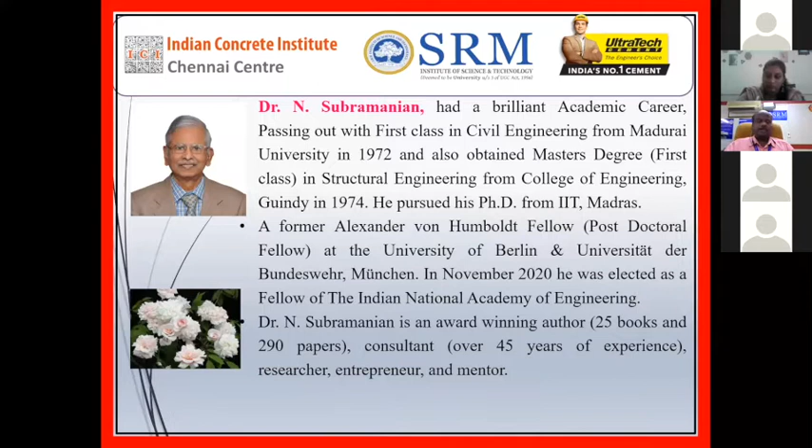Our speaker is an award-winning author, consultant, researcher, entrepreneur, and mentor. We have such an eminent speaker today to deliver the lecture. Our speaker dedicated his life mainly to education and the enhancement of knowledge of young budding engineers, and mentored them through his books, research papers, and also through social media and lectures, and through leadership roles in various professional organizations.

Dr. N. Subramanian also wrote a book, Computers and the Basic Language, in Tamil, and also wrote a few Tamil articles published in Tamil Computers and Dinamani. He has also reviewed several books and papers for many reviewed and refereed journals. He has received many awards, including the Tamil Nadu Scientist Award, Gaurav Award from the Association of Consulting Engineers, Lifetime Achievement Award from the ICI, and Best Book Award from the Association of Consulting Engineers India for 3 different books.

In addition, he received a Distinguished Alumni Award from the College of Engineering, Anna University. The American Society of Civil Engineers recognized his professional accomplishments; he was selected as a Fellow in the year 2001, a prestigious honor held by fewer than 4% of ASCE members, and he also became a Life Fellow in 2015.

In addition, he has played an active role in the Rotary movement through social activities and served in several positions, including president of the Rotary Club of Madras and also as a district official. As president of the club, he conducted several projects and received awards from the district. He has visited more than 15 countries, in addition to living in Germany for 2 years and living in the USA for the past 17 years.

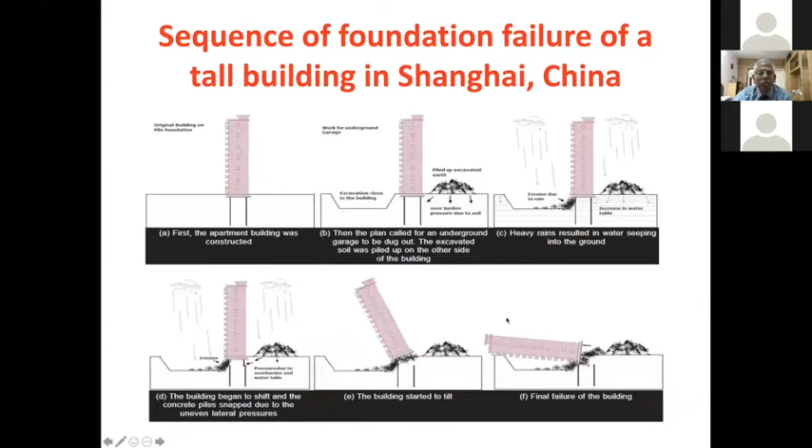Unfortunately, in India, we don't publish the causes of failure. Probably Professor Santhakumar, who was on the committee, will explain more about this Moulivakkam failure in his last lecture. The causes are mostly gross deficiency in the design of RC columns. Some critical columns were removed for enlargement of the car park, along with substandard materials and poor supervision of construction.

The next collapse I am going to talk about is the Savar building collapse in Bangladesh, considered the deadliest structural failure in modern human history. This happened in 2013. An 8-story commercial building collapsed in the capital of Bangladesh, killing 1,129 people and injuring 2,515 people. We will see the causes of this failure.

The building contained clothing factories, a bank, apartments, and several other shops. The shops and bank at the lower floors were immediately closed after cracks were discovered. This is a very important thing: whenever you see large cracks, you should not allow people to go inside any building or bridges. Warnings to avoid using the building after cracks appeared the day before had been ignored. Workers were ordered to return the following day, and the building collapsed during the morning rush hour.

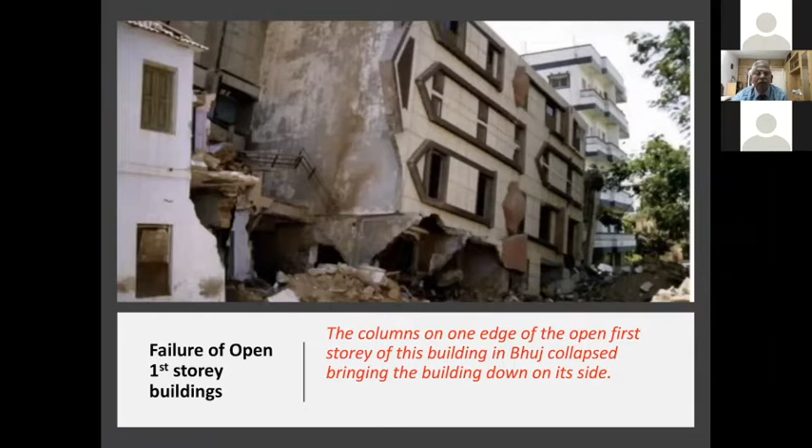And next, we will go to failure of beams and slabs. This is a very interesting failure which was presented by D. Srinivasan, who was the Secretary General of ICI, in 1975 in ICJ. Actually, this building was constructed in Neyveli. It had a span of 18 meters. As the bars were supplied at standard lengths of 12 meters, most of the rebars were lapped at the center of the beam where the failure occurred.

So this happened in 1962. The beams in the central bay were reinforced with 7 38 diameter plus 1 20 mm diameter at bottom and 1 38 mm diameter plus 6 32 diameter bars at the top with a cross section of 1425 by 600 mm. The concrete was M15 because at that time M15 was allowed. During the removal of shuttering on 26 January 1962, the entire roof caved in along the ridge. It is because all the bars were lapped at the same point.

Of course, failure of slabs are rare, especially in small buildings, but in high-rise buildings, especially using flat slab, you have to be very careful to support them properly. This is a failure which happened in Virginia, USA. This 30-story cast-in-place

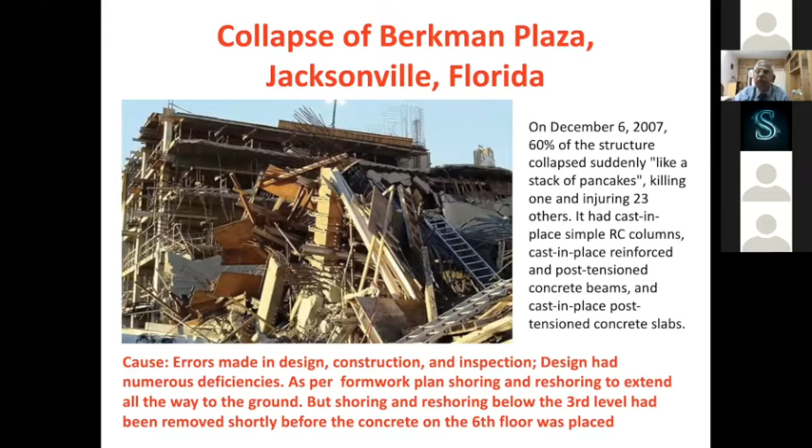The next one I am going to show is the progressive collapse of Ronan Point building. This is a very interesting failure which resulted in code changes. Actually, the progressive collapse provisions were introduced in the British code and also in other codes in the 1970s as a result of this failure.

This is a 22-story tower in East London. It suffered a partial collapse when a gas explosion demolished a load-bearing wall, causing the collapse of one entire corner of the building, which you see here. 4 people were killed and 17 were injured.

Actually, I think I have removed some of the slides due to terrorist attacks. So as a result of terror attacks on embassies abroad and Murrah Federal Building in Oklahoma City, abnormal loads were introduced in the US codes. And I think in the 5th revision of IS 456, structural integrity requirements are also being introduced. I have discussed this already.

So bridge failures, several bridge failures occur. I think from one of the papers I read, I see that bridge failures are in India as well as abroad. So I am showing.

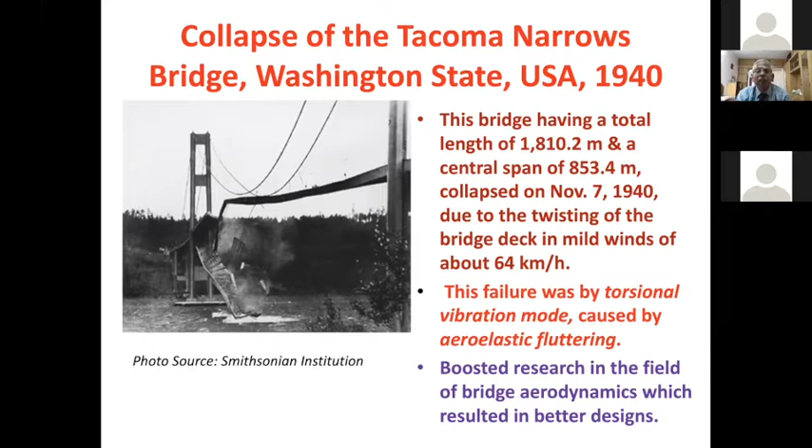This is another interesting failure of cooling towers at Ferrybridge, UK. These are the three 115-meter tall hyperbolic cooling towers which failed through snap-through buckling in England in 1965 due to vibrations in 137 kilometers per hour winds. The main cause was that the average wind speed over a 1 minute period was used in the design, whereas the structures were susceptible to much shorter gusts, which were not considered in the original design.

Actually, the designers used wind loading based on experiments using a single isolated tower. But in reality, you see 8 towers are placed close by. The shape and arrangement of these cooling towers created turbulence and vortices on the leeward towers. Similar failures resulted in the revision of building codes all over the world to include provisions regarding improved structural support and the necessity of doing wind tunnel tests for complicated configurations and arrangements.

So the next 2 slides are actually steel structures, but I just want to show that detailing errors can cause catastrophic failures. So this is a structure which failed in Kansas City, Missouri. 2 overhead walkways in the hotel loaded with partygoers crashed onto a dance floor in the lobby, killing 114 and injuring 216.

Recently you might have heard about this Champlain Towers, Miami. It was built in 1981. The 13-floor flat slab building collapsed suddenly on June 24, 2021, after 40 years, killing 98 people. The official cause of the failure is not yet known, but there is an investigation going on, which will be publicized later on. But I feel that the failure is due to corrosion of rebars due to improper maintenance, punching of the flat slab due to this, and column failure due to corrosion may be the cause of failure.

And the final case study which I am going to show, once again like the first slide I showed about the foundation failure, I am closing it with another foundation failure. Actually, it has not yet failed, but it has sunk. It was opened in 2009. It consists of a 12-story tower and a 58-story, 197 meter tall Millennium Tower. Of course, the sinking happened only in the Millennium Tower.

In 2016, the tower sank 41 centimeters with a 5.1 centimeter tilt at the base and 15 centimeter tilt at the top, and caused cracks in the basements and the pavement surrounding the tower. In 2018, the sinking increased to 46 centimeters with a lean of 36 centimeters. Actually, you see that initially they provided friction piles only. They did not go up to the bedrock. But now

So in summary, several failures of RC and steel structures are happening throughout the world at regular intervals, and the failures may be due to problems in foundation, columns, beams, slabs, walls, or due to wind, earthquakes, or severe loading. Though design errors are rare, as I told you in the last slide, many errors are due to detailing, execution, corrosion, or improper maintenance and poor materials.

It is important for structural engineers to study these collapses, find out the causes, and avoid these mistakes in their own practice. Unfortunately, in India, the causes of failures are not made known. It is also important to have peer review of design, especially for special buildings or very large buildings. And it is very important to have coordination between the parties involved in the construction. That is, designers, builders, and architects should coordinate and clearly explain the concepts. Computer results should not be blindly accepted, and maintenance is as important as construction.

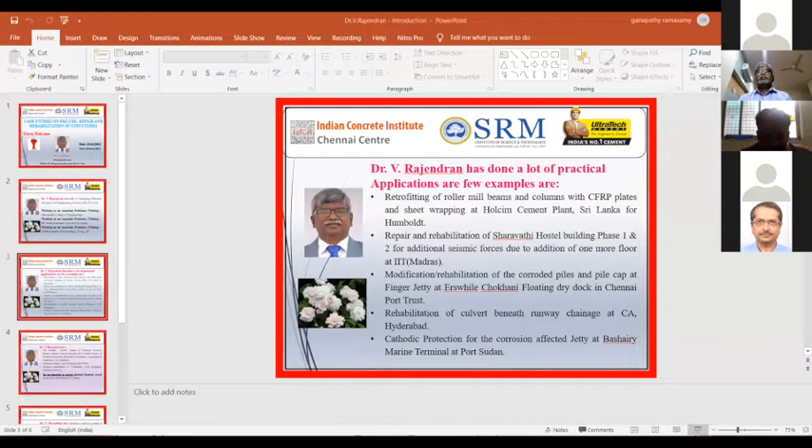He is working as a visiting associate professor in various colleges like Meenakshi Engineering College, B.S. Abdur Rahman Crescent University, GMR Institute of Technology, Vizag. And Rajendran sir has done a lot of practical applications. A few examples: retrofitting of roller mill beams and columns with CFRP plates and sheet wrapping at a cement plant in Sri Lanka for Humboldt. Repair and rehabilitation of Sharavathi Hostel building, phase 1 and phase 2, for additional seismic forces due to addition of one more floor at IIT Madras.

Rehabilitation of the corroded piles and pile cap at the Finger Jetty at the erstwhile floating dry dock in Chennai Port Trust. Rehabilitation of a culvert beneath the runway at Hyderabad. Cathodic protection for the corrosion-affected jetty at a marine terminal at Port Sudan. So these are some of the examples of the practical applications.

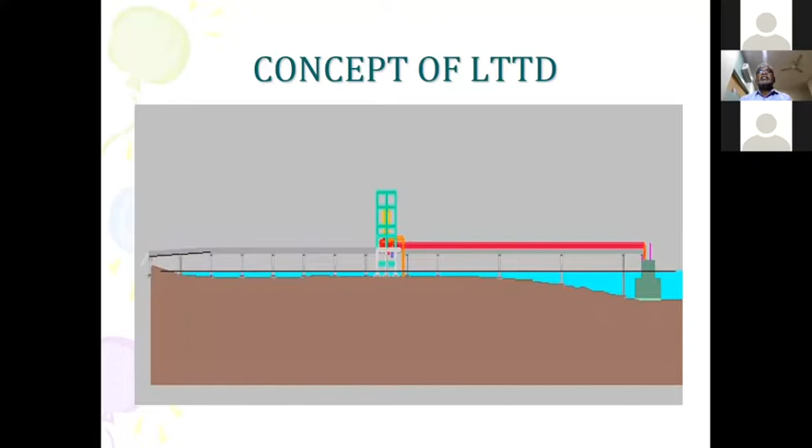The warm water is flashed inside the vacuum flash chamber, and the resultant vapor is condensed using cold water. For getting 1 liter of drinking water, about 400 to 450 liters of seawater is drawn through a 600 millimeter diameter pipe. When it is sent back, it is proposed to use a 230 millimeter diameter pipe, so that you will have a captive power plant producing electricity, making the entire project self-sustained. The biggest advantage is there's no chemical addition needed for this drinking water, and it's not a reverse osmosis system where you need to keep changing the membrane frequently. It is a completely self-sustainable project.

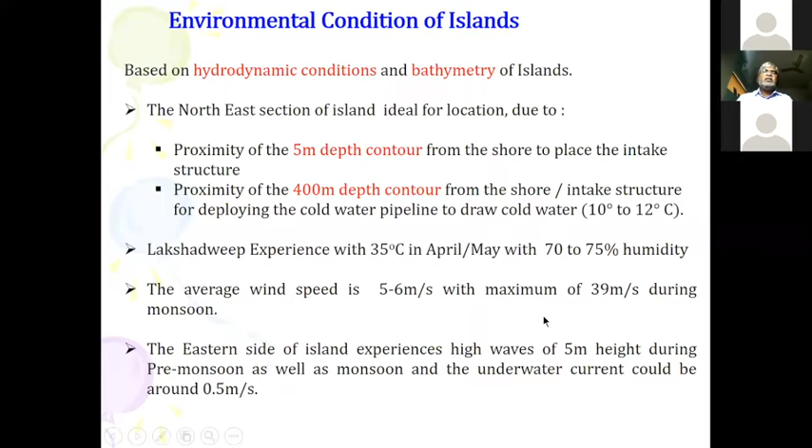The environmental conditions were studied: a proximity of 5-meter depth contour on the shore for the intake structure, and a 400-meter deep contour from the shore to intake water at about 10 to 12 degrees temperature. This was done during April, May, with 35 degrees surface water, humidity of 70 to 75%, and average wind speed about 5 to 6 meters per second, maximum 39 meters per second during monsoon. The wave load taken for this design is about 200 kilonewton per square meter, with maximum wave height about 5 meters pre-monsoon and 9 meters during monsoon. These are the data collected for the design aspect.

The dimensions of the sump: the floating foundation at the bottom is going to be about 12.17 meters by 8.3 by 9.1. Since during peak monsoon you'll have about 9 meters of wave height, and pre-monsoon 5 meters, 9.1 is what we designed for the sump foundation. Over this you will have 2 watertight compartments in the sump, with 2 electrical motors for drawing water, which is actually an intake structure, otherwise you wouldn't call it a sump.

The design takes into account dead load, live load, equipment load, erection load, wind load, hydrostatic load, and load combinations as per code 4651. All loads were taken, and 200 kilonewton per square meter was the wave load used, which was also tested for overturning and sliding, because the sump is anchored only at one end, like a cantilever retaining wall. So overturning was checked, and sliding was checked, all as per the design calculations.

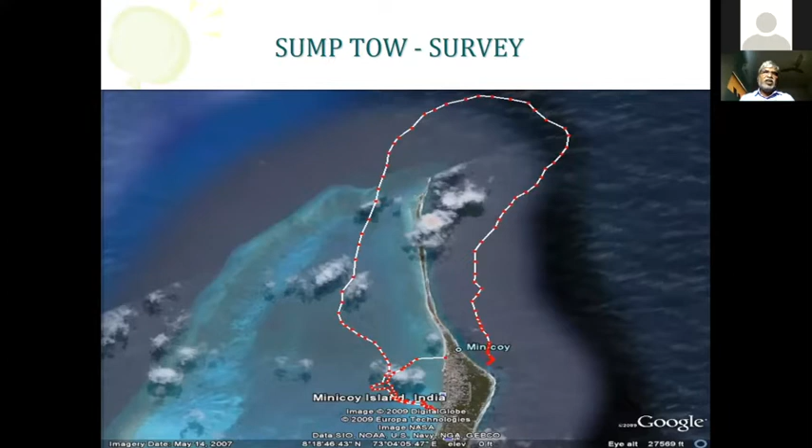Now let me go to the pictures and show what happened. This is an aerial view of the island. Initially we did a bathymetric survey to find the maximum depth by which we'll be able to take the sump through the mouth of the island, and bring it to the other side where a fisheries harbor jetty is already available, so it can be tied for partial construction and continue the rest.

As we know, the bottom of the sea is not going to be plain, it has a lot of undulation. So permission was given for a 15 meter by 15 meter area where the seabed surface can be made fairly leveled. We also proposed a pipe on raft foundation, so that once the sump or floating structure is anchored into the seabed to a depth of about 12 meters through a 32 millimeter diameter anchor rod with polyester resin that sets underwater, we also wanted to grout the base of the raft after construction with non-shrink underwater grout. So chipping was done to the maximum possible extent, so we don't have any point load on the raft design, since it is taken as a UDL.

Now, construction on shore: as we see, we have already done the bathymetric survey. Based on the survey, we determined to what extent we'll be able to float. We got about 200 tonnes as the load that can float on the other side of the island before bringing it to the mouth of the island.

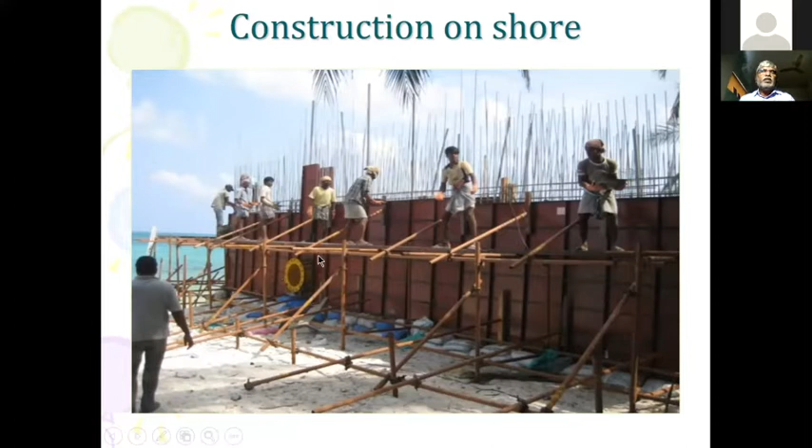So we have gone up to 3.5 meter, and you can find all these inserts have been provided for the pipelines to get connected. As I said, it's about 3.5 meter, and 200 tonner is the buoyancy which can float. We have taken about 170 tonner as the weight of this at this particular point.

As I explained already, although we are going to make the seabed a fairly level surface, we will not be able to make it pakka. So what we did is, when we casted this raft, we provided PVC pipes, about 18 numbers, so that we'll be pouring non-shrink free flow grout which sets underwater after making the barricading underneath the seabed at 9.1 meter, so that this grout does not flow. As this grout has the property of non-shrink, it expands and makes a perfect contact between the bottom of the raft and the seabed.

That's like any other slipway arrangement that has been done. A slipway arrangement was made, which is normally done in the harbor, where you'll be able to push this into the water and it will float, and you'll be able to bring it out through the mouth of the sea. So, in addition to pushing, we also wanted to pull it.

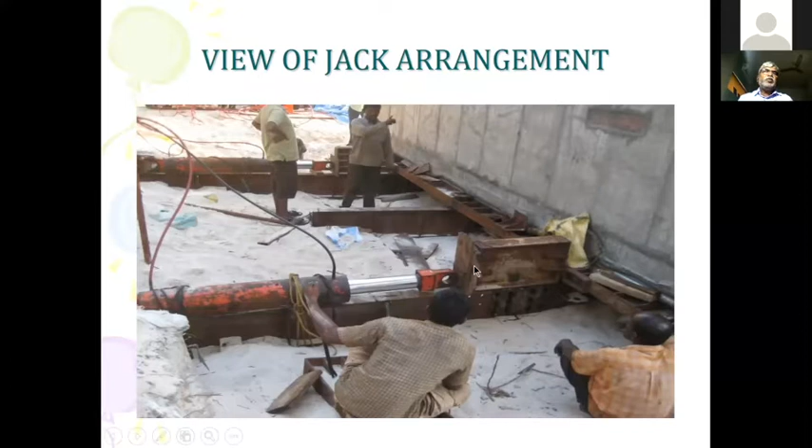You can find anchors have been placed where the sump is there in the shore, and anchors have also been placed over here. Simultaneously, both pushing and pulling has been done, and 200-tonner jacks have been used to push this sump into the water during the low tide level, so that the steel frame arrangement for the slipway can be monitored properly, whether the underneath support is in position or moving.

So this is during the low tide level, and once you get the high tide level, it starts floating, and then you just bring it out through the mouth of the island and bring it to the fisheries harbor jetty, which has already been there and is being used by the Lakshadweep Harbor Works.

Further construction has been done, and later on, after taking this and putting it in position, we'll be filling this with pig iron, or otherwise with blue metal of 40 mm, so that the dead weight calculation goes as per the design calculations. Actually, this is the structure we would like to have functionally for using this.

We used completely Tata CRS steel. I would like to pass on this information: although we bought this corrosion resistant steel well before it was even used, we found that when it was there on the shore itself, despite being CRS, a number of rods got corroded on the shore itself, well before it was put into use.

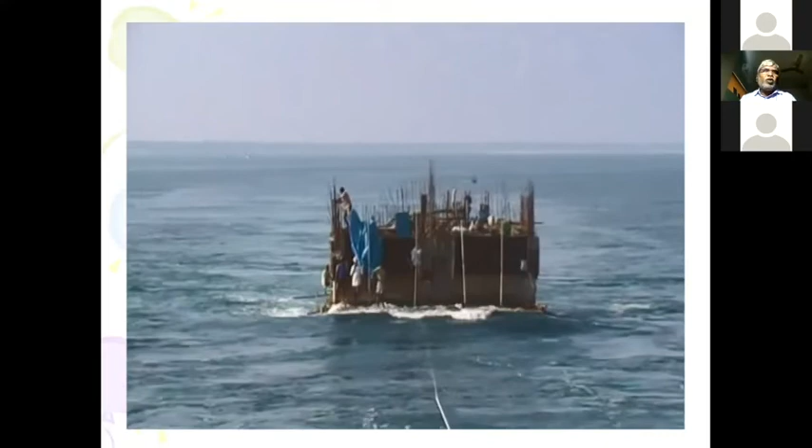So we thought CRS was going to be a foolproof system where nothing would happen, but that was not the case. After that, this was taken, and the entire structure was taken out when it comes to the open sea with further construction, which was floated, and it took about 4 nights and 5 days for us to bring the structure to the other side of the island, so that we would be able to anchor it, and the proposed bridge structure and plant structure is being done.

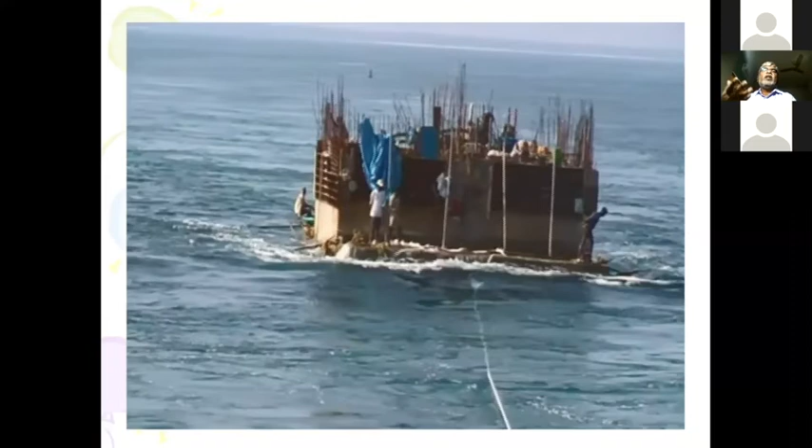The challenge over here is the cold joint. We don't want any cold joint leaking to take place, so we have used both type A and type B waterproofing systems, because type A alone we will not be able to go as per BS 8102:2009. We used water stoppers, both PVC and expandable swellable water stoppers, and admixtures giving about 6 hours slump retention, avoiding to the best possible extent any cold joint issue, so that it doesn't leak and water get into it.

So this was floated and then brought to the particular place where it is supposed to be anchored, and the anchoring was done as we discussed. This is the structure which is going to come under the wave breaking zone, or a bit earlier to that. This particular area is where you're going to have much of the issue, where this wave breaking zone is coming, and the maximum force is going to be over there.

As I said, even the foundations also will not be able to do cast in situ foundation. It has been isolated foundations that were originally designed, cast at site, and then we took that and positioned it.

Especially in the wave breaking zone, it was not a single isolated footing. Partial work was done, and this was also floated.

Now the problem is, at least the sump can be brought through the mouth of the lagoon. Where it comes to the open sea, buoyancy is not an issue at all. But in this case, the depth is going to be very low.

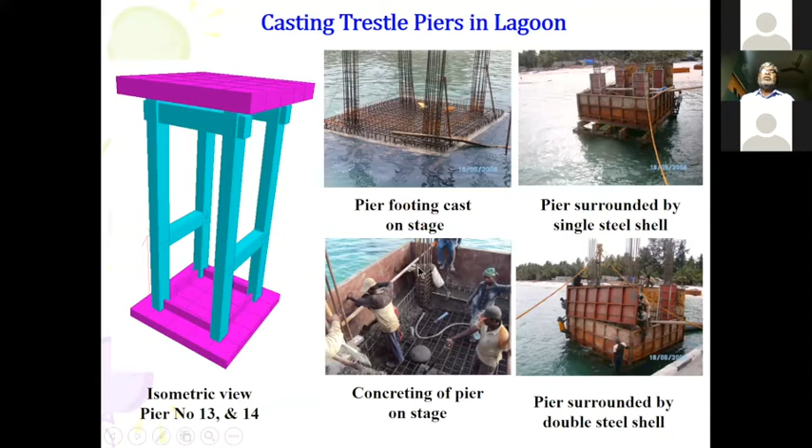So we need to provide additional buoyancy. We made the same shuttering formwork system all around, and provided sealant in the joints so that no water gets percolated. In addition, we also used pipes for getting the additional buoyancy force. Once it was done and made perfect, the partial concreting was done.

You can find this for additional buoyancy. We also tied these tubes so that it can float without any issue. Then, the same way the sump structure has been floated, this was also taken, and you can find the sump has already been anchored into the seabed.

Now for the bridge structure, you need to align it, position it, and anchor it. The line and length was not a problem because we were able to achieve it at all 4 levels. We had tied it and then brought it down to the perfect position.

If it is not sinking into the perfect line and length, we will have a problem, because the top girders coming in, the concrete precast girders, don't have much play on that, so it has to be positioned in a proper manner.

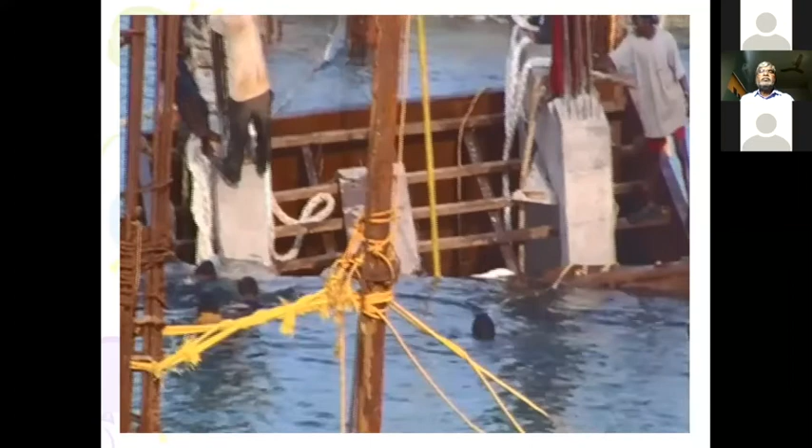The whole issue involved a lot of constraints. Now you can find the length, size, and line are not an issue. It is perfectly on the line which is expected.

The problem we faced, which pushed us into rehabilitation or retrofitting, was this P12 pier. As I told you, there were precast beams, and after that these precast beams were placed on top of these columns, then concreted with micro concrete, so that there was no issue as far as the congested reinforcement was concerned.

We used this A-frame, which is normally used for girder launching from one pier to the other, and deck slab casting was done.

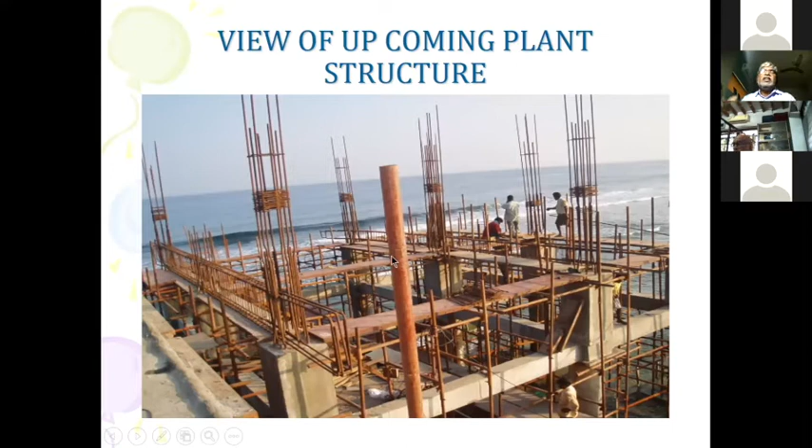This is a modeling of the plant structure. This is the plant structure which is under construction. Here we don't have much of an issue because it's not under the wave breaking zone.

Once everything was over, at high tide level, we removed the steel sheets all around it, and then wanted to proceed with further construction of the column height to match the level of the girder.

We found that during the monsoon, heavy forces were there, but this was already taken into design consideration. We went underneath and found that there's a crack taking place in 2 columns of the foundation, which started slightly as a crack and began leaning.

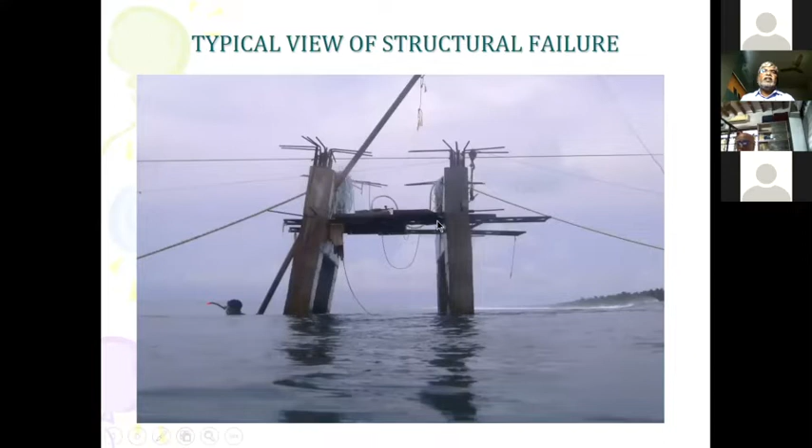The crack kept widening, and then concrete started falling. You can find it started leaning towards this, and at one point it had already come and touched the other 2 columns. If you look at the bottom, you can find there is absolutely no concrete where the raft and the column join.

After these columns touched the other 2 columns, once the moment was over, we had shear into effect. These 20 millimeter diameter bars, 4 numbers, got completely cut, as if cut with a cutting machine or hacksaw frame, and all these ties were not in position. This is what happened, and again and again we started redoing this.

Revisiting the STAAD modeling, the modeling was done perfectly and there was no issue, no error. Everything was done, and design check was carried out. In fact, we also involved IIT for a proof check, and the proof check was done, and everything was in line.

But finally, we had this issue at the site. This was the failure which had taken place.

Now, how was it rectified? What we did is, we first needed to bring back the column into position and go underneath, underwater.

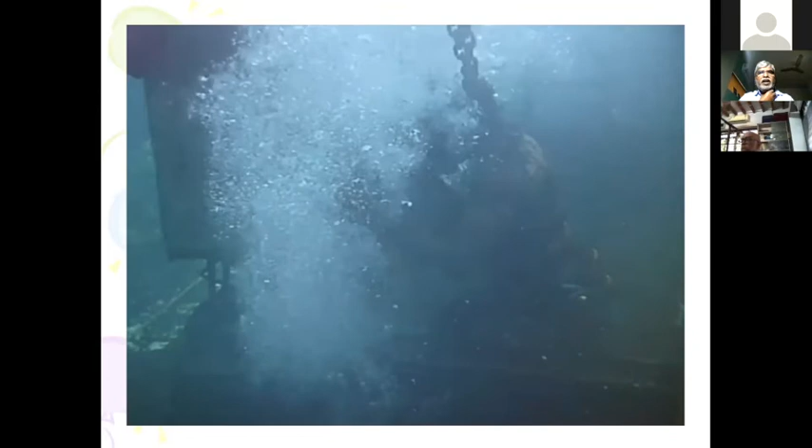Use the hydraulic drilling equipment, where you'll be able to make holes into the raft, and then provide additional reinforcement and put formwork and make the underwater epoxy concrete, so that you'll be able to set both underwater and be able to take care of your expected moments and loads.

It's very simple. Like what we do on the shore, the same thing has been done over the foundation at the raft, about 9.8 meters to 10 meters roughly from the sea level. After that, the reinforcement detailing of this cage was placed, the formwork was made, and we were able to do this underwater epoxy concrete, and it was done.

Now again, the problem is, although you do the underwater epoxy concrete, we will not be able to wait for the girders to come and then place it. So this time we didn't want to take chances. No sooner the column had been brought to the level we needed for the bridge, we made a steel girder ready before the rehabilitation works started, because even to take this underwater epoxy concrete, it took about 45 days for us from Calcutta to the site.

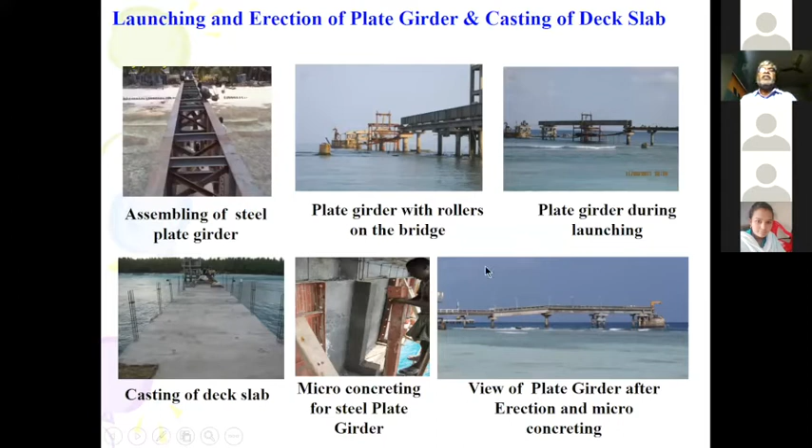Logistics is the biggest problem, and reaching the site is another issue. In fact, even for the working team to go, you need to get the permit and then reach. Although it is a part and parcel of India, we cannot go just like that. So we had taken additional steel from Calicut and made this steel girder assembled. The moment the column came to that level, the steel girder was placed in position, and the deck slab concreting was done.

Actually, what went wrong here is that we did not take seriously the sequence of operation in terms of the load which is going to act on the structure well before the girder was placed. As we all know, in the modeling, we make all the members connected together. For example, column, then beam, then slab, members parallel to x-axis, parallel to y-axis. All that gets connected, and finally we go to the command of application of load, process the analysis, take out the salient features of bending moment, shear, or whatever it is, and then do the design.

But here, well before the girder was placed over the column, the complete load started acting on these columns. In the modeling, both ends were considered fixed, whereas when the full load was applied during the monsoon, one end was fixed and the other end was completely free. The end condition was not the same as what we adopted in the modeling, which caused a complete failure. Normally in prefab structures, we say that handling stresses are always much more than the actual stresses.

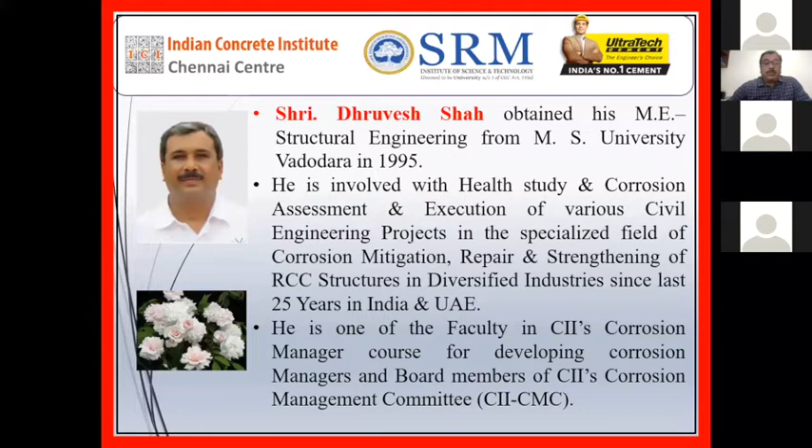UAE. He is one of the faculty in CII's Corrosion Manager course for developing corrosion managers and board members of CII's Corrosion Management Committee. Our speaker has delivered various presentations and published technical papers in FICCI, NACE, CORCON and ReadyCon and NIGIS SZ at IIT Madras, IIT Bhubaneswar and various private universities.

Currently, he is Head India Business for MS Vector Corrosion Technologies, Canada in India, and consultant for corrosion mitigation and strengthening of RCC structures. Recently, he has published an article in Journal of Building Engineering on the title Long-Term Performance and Life Cycle Cost Benefits of Cathodic Protection of Concrete Structures using galvanic anodes along with other researchers. We welcome you, sir.

Thank you. I will share my screen. Yes, sir. You can proceed. Is it visible now? Yes, sir. It's visible. Yes, sir.

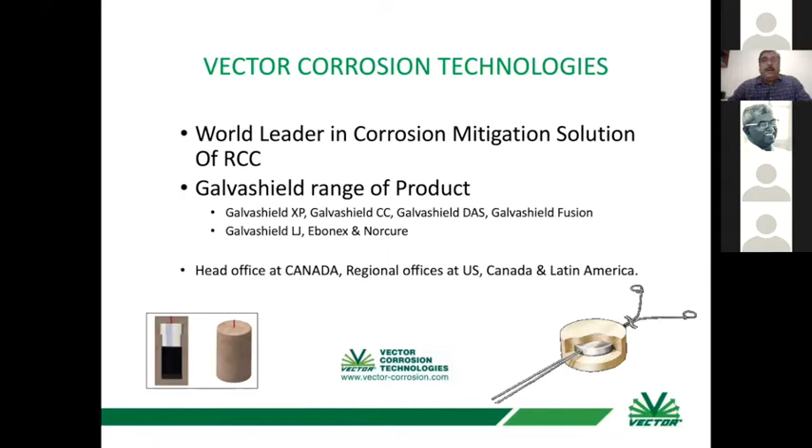And regarding failure of structures, I will not take much time, as our earlier speakers had shared a lot about the failures with wonderful case studies. Basically, they can be natural calamity, design and construction stage, environmental stage, and man-made changes in the use, or you can say abuse of the structure, which causes failures. In technical terms, it can be a structural failure and durability failures. And these durability failures lead to structural failures. And structural failures can be a compression failure, flexure, shear, punching shear, or deflection.

But I will talk more about the durability parameters, because of the leakages, there is a problem with the structure and corrosion. This corrosion induces cracks and spalls in the structure, and then it further reduces the load carrying capacity of the structure, and it leads to a structural failure in various forms. So corrosion, what rightly another attendee has asked Dr. Rajendran, what to do for the corrosion of rebar underwater. I will take care of how to take care of corrosion in case of environmentally exposed condition.

Just to go in detail with other case studies, I will have one slide for the corrosion cell in the concrete. This is a simple concrete where the two steels are tied and the rebar is having a good passivating layer because of the high pH of the fresh concrete. And when there is a contamination in the form of chloride, which you have prominently in Chennai, the chloride ingress may be due to diffusion or various other ways which I don't want to go into right now.

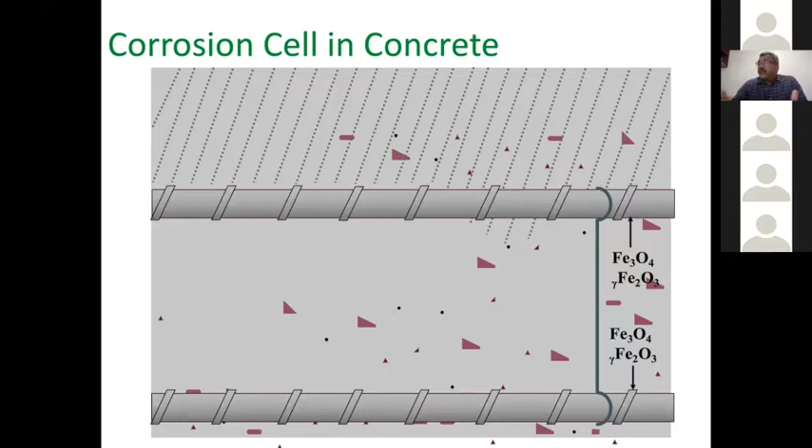When chloride ingresses, it reduces the passivating layer, and in presence of oxygen and water, which is quite possible with high humidity, the steel which is in vicinity of the contamination will become anode, which will corrode, and the steel which is away from the contamination will become cathode, and the entire chemical reaction happens, and you will get a brown color thing called rust. As we all know, when rust expands, it induces stresses, and the cover concrete, which is weaker than the core concrete, will have a lot of cracks.

And so that's why we see cracks and spalls in the cover concrete rather than the core concrete in any of the typical structures, from a slab or from any of the structures. With these basics of why corrosion happens in concrete particularly, I will go to the next slides.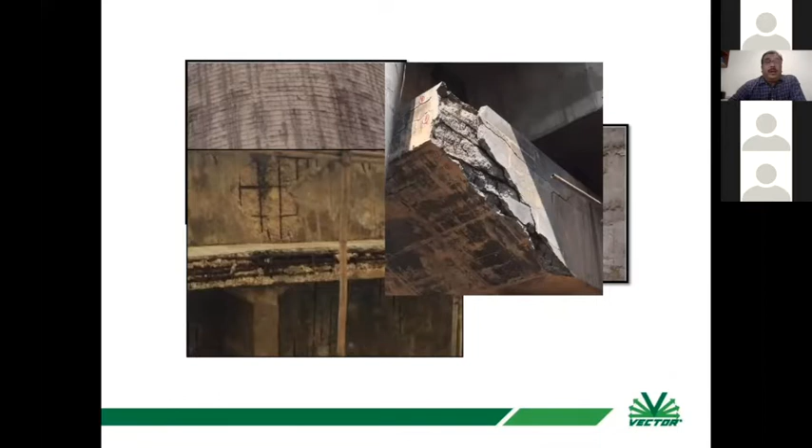And because of this corrosion, you can see a 6 to 8 year old cooling tower with a lot of corrosion. You have a beam of a jetty, like the soffit of a jetty. This is a typical pier of a railway overbridge which got corroded. And imagine if this fails, then Gujarat's Western Railway main line will collapse. And you have a column having a lot of corrosion, still it is standing.

And a collapse of a bridge, a typical structural failure of a bridge from the middle of the span because of failure of PT strands, which are a highly neglected item in the entire bridge structure nowadays. One needs to take care of corrosion of PT strands, because they take the majority of the load, and when they corrode and break, this thing can happen.

We are supposed to protect this bridge, but because of the formalities and bureaucracy, before we are supposed to start, it fails. This is the condition of a pile of one of the bridges, which is hardly 10 to 12 years old.

And this is a new problem upcoming in mega cities like Mumbai, Chennai or Kolkata, where in a newly constructed building, before people start staying in it, you find this type of problem. Imagine you are spending a crore rupees or 75 lakh rupees to buy a flat in such a multi-story building, and you see this structure, what will happen?

This is just because of ingress of chloride or chloride admixed during construction. It may be due to curing water not taken care of properly, or sand used which has high chloride, or whatever the reason. But the chloride is there from the first day, which is a cancer for the concrete, and it starts corroding the rebar, and then it leads to structural failure. We don't want these failures because of corrosion.

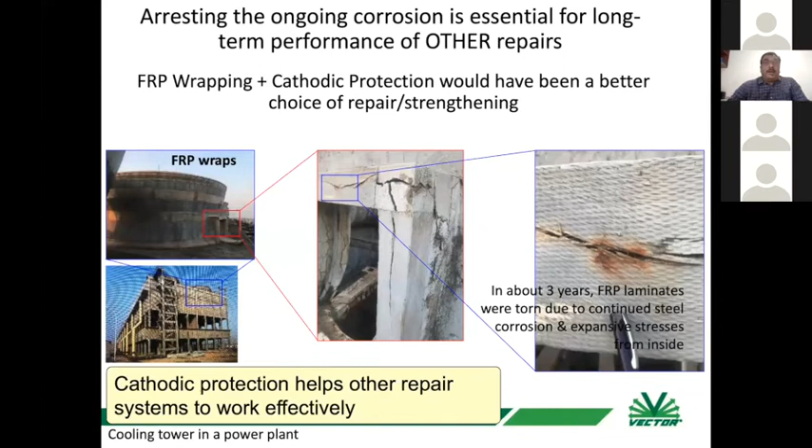We have a standard practice of structural strengthening using CFRP wrap. And when we design CFRP, even ACI 440 says that unless you take care of corrosion going on inside the RCC structure, you cannot do strengthening using a CFRP system. And it fails. We had various examples, as we can see on the screen.

And to go for any repair, I will have one or two slides on the health study and corrosion survey. When we say we have done NDT, it should not be confined to only UPV and rebound hammer or at most core strength. You should have a proper corrosion survey. You should find out the reason for the damage or distress, cracks, falling, or whatever failure is there. You have to take a holistic NDT approach, finding the corrosion probability using half cell potential.

You should know the existing cover, the existing strength, the chemical analysis, how the cracks are, the corrosion rate of the steel, and the concrete resistivity. When you take all this NDT, interpret and have a simultaneous view, and then find out the reason, you can have a very good solution.

There was a study carried out along with IIT Madras, and it was found that for the majority of structures, the repaired part fails once corrosion has initiated; when we repair during the propagation time, it fails within 4 to 5 years in the majority of structures.

And very few structures have more than 7 years of life. We don't want this. We don't want main structure repair, or repair of repair, and again re-repair. We should have a structure repaired considering a life of at least 20 to 25 years, based on the economics, value engineering and importance of the structure. So that has to be taken care of.

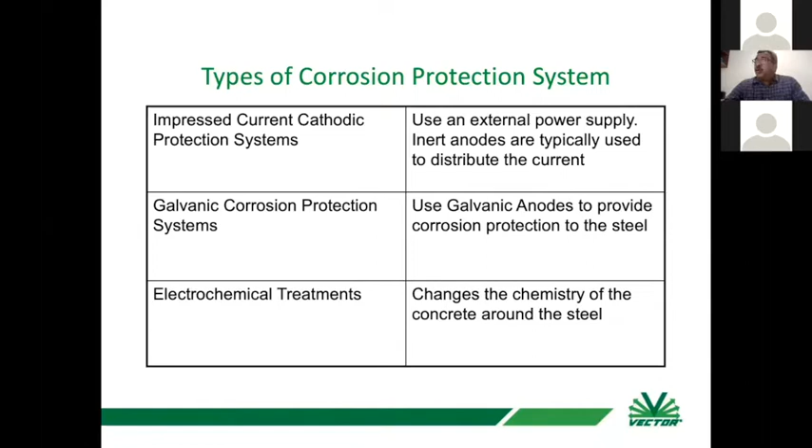When it comes to corrosion protection systems, there are levels of corrosion protection. Like we say concrete, I want to do concrete, but which type of concrete? Similarly, corrosion prevention, corrosion control, and cathodic protection. As you go to a higher level of protection, you need more current and a more enhanced, advanced system. So we will see some examples of corrosion prevention, corrosion control, and corrosion protection.

Corrosion prevention means you don't want the steel to start corroding, so you need very little current. And if corrosion is already going on, you want to control the speed of the corrosion, which comes under corrosion control. And cathodic protection is a whole-structure, foolproof system, wherein you can take a risk. Definitely it comes with a higher cost. And considering the structure's importance, we can go for any of the systems.

But before deciding the system and what level of protection we want, we should understand how to design. In a short time of 25-30 minutes, I cannot explain the entire design, but I can share the basic points one should consider before selecting the corrosion protection system. One should know the location of the structure.

Whether it is Chennai or Delhi, it's a different case. Chennai is exposed to chloride contamination. If you go to a city called Ankleshwar in Gujarat, there are a lot of chemical industries, or if you go to New Delhi, there is more carbonation effect than chloride.

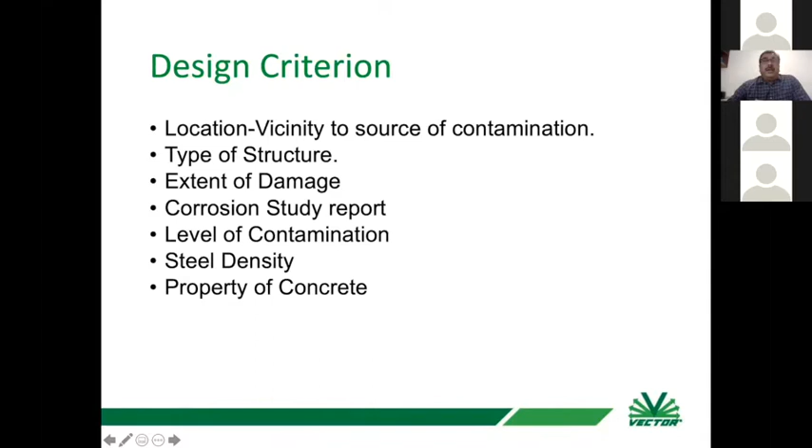And then steel density. Steel density, please don't misunderstand it as the weight or diameter of the steel, the cross section of the steel, which is a structural parameter. When it comes to the durability parameter, you should know the surface area of the steel, because we want to protect the surface of the steel from corrosion.

Property of the concrete also comes in the picture. If you have a very high grade of concrete or use various types of fines or replacement of cement, then the resistivity changes. Or if you have other types of concrete, then resistivity changes. You should consider the property of concrete for the design criteria.

Design life. This is the design life of the anode. Like the anode should function for 20 years, 25 years, so you can have a corrosion-free life of the structure for 25 years. That is what I'm emphasizing.

I'm doing these repairs and rehabilitation since 25 years, almost 26 years, and I found that 75% of the structures are having failures or distress mainly due to corrosion. And if you can delay the corrosion for a long time, you can have fewer failures and good structures. So design life of the anode to be considered, and level of protection, which I explained earlier.

Installation limitation: if access is not there or if you need to have other non-structural changes done to install the anodes, then it comes in the design criteria. Regarding the performance criteria, once you design the system, how should one know as a designer in which way my cathodic protection should perform? How can I say that yes, it is performing?

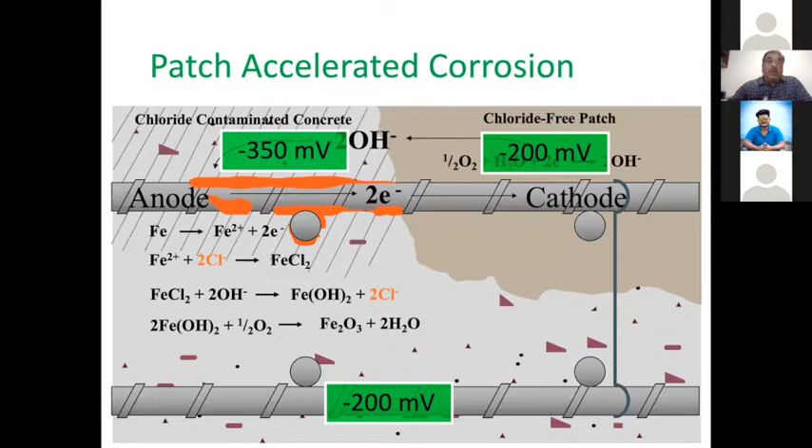If you want a long-term repair, we need to incorporate some system. We can use galvanic corrosion protection system, which is an innovative and advanced concept, and it is very good for atmospherically exposed concrete. In case of submerged concrete, we don't have much free oxygen available since it's submerged in water. So the corrosion rate, particularly in the deeper sea, is less. So we are...

The zinc will corrode because of very high negative potential, and it will not allow the reinforcement to corrode, and you can have a durable and good patch repair.

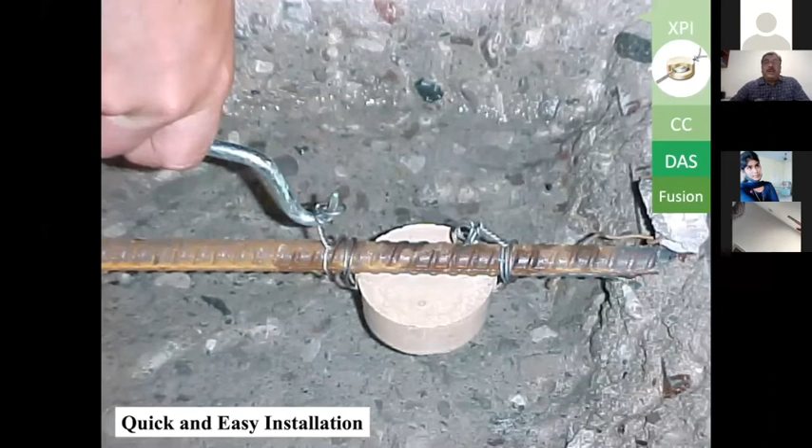This is how we do a normal patch repair: proper cleaning, saw cut, soaking, and applying the mortar. The additional thing is you have to tie an anode like this. After tying, you check the connectivity, whether it is properly connected to the steel. At the connection, the steel should be cleaned properly and there should not be any coating over the steel. This has to be ensured, otherwise the anode will not function.

I had seen various cases where the anodes were loosely connected or lying outside the concrete. You can see the anode is inside the concrete cover, there is a proper cover over the anode so that ionic movement can happen from the cover part, and the steel is properly connected so the anode will function.

We had one beam installed in 1999, and we have been monitoring it for about 22 years. What I'm telling is based on factual data of what was installed, monitored and analyzed. We found that at 20 years the data shows this type of anode can give a current density in the range of around 0.2 to 2 milliampere per meter square, as per EN 12696, and it is protecting the structure. These anodes were designed for 15 years, but they are protecting up to 20 years. This shows we are passivating the steel better over years when we use a sacrificial anode system.

There can be a longer, similar discrete anode which can give you higher current. It can be a distributed anode, a longer strip anode which you install when there is high density, high amount of steel, or high contamination. Then you need a more current and longer anodes. The discrete point anodes have a lesser current, which is good for prevention. When it comes to cathodic protection, if you use longer rod anodes, it gives you very high current as per the requirement, and it functions wonderfully.

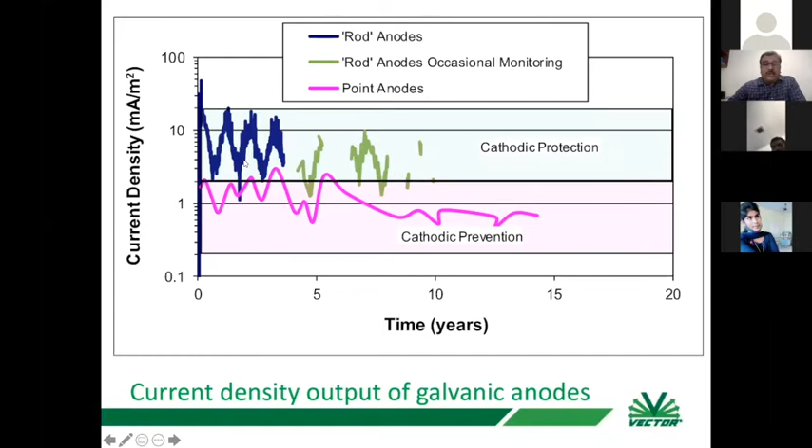I will show you a few case studies now with basics: the majority of failures are due to corrosion. Why does corrosion happen in a concrete structure? You should take proper NDT, and there are various cathodic protection systems available: ICCP, sacrificial, electrochemical treatment. With 20 years of experience, we found that galvanic based sacrificial anode systems are very good in functioning and protecting against reinforcement corrosion.

These types of anodes have been available in India for almost 2 decades, or 15 years. Earlier we were not having much technical experience and backup because it was a new technology. But I will thank Dr. Rajendran, who introduced this system almost 12 years back, when he was supposed to repair one 8-year-old jetty at Chennai.

And they found out that the chloride concentration was very high and there was significant mass loss of steel, and reinforcement were supposed to replace. So they just added point anodes here.

The design was done, and now with experience we had further rationalized the design, but the design done was 1 unit per meter square, and even a monitoring box was installed. And this is how the work was done. Concrete jacketing was done in all new reinforcement.

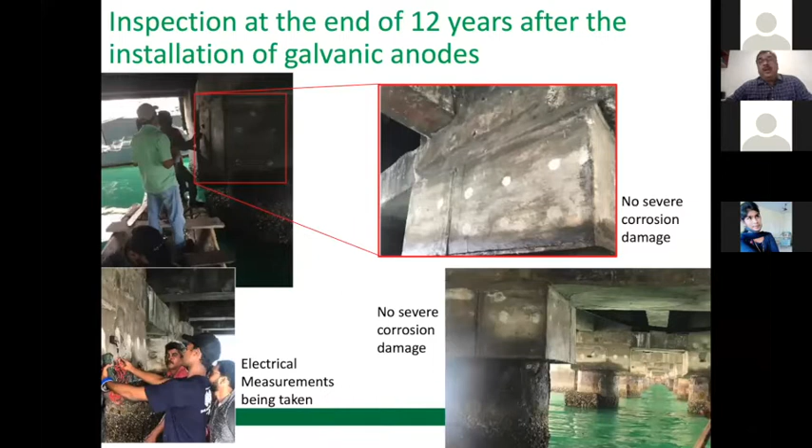Anodes have been installed. What we did is after 12 years, along with the IIT team, we had a visit there, and we found that there was no severe corrosion damage in the same structure where it was jacketed. Electrical measurements were taken, and it was found that the anodes are still protecting after 12 years, within very, very high spacing, which we normally don't recommend now.

We had checked there for 4 years as per the contract, and we found that there was depolarization potential of more than 100 millivolts. So it shows that for 4 years the anode were performing, and then the monitoring was not possible. But after 12 years, we see physically there was no significant damage, and the current was measured. Still, at various 8 locations we are having a good current after 12 years. So the anodes are functioning. If somebody wants, they can have a boat and visit the same structure even now.

Imagine in 8 years of service life, there was significant damage. And when you repair it using a sacrificial anode system, after 12 years you have very minimal cracks, not a major corrosion problem like what was there in 8 years. So this type of repair is required. A professional approach has to be done.

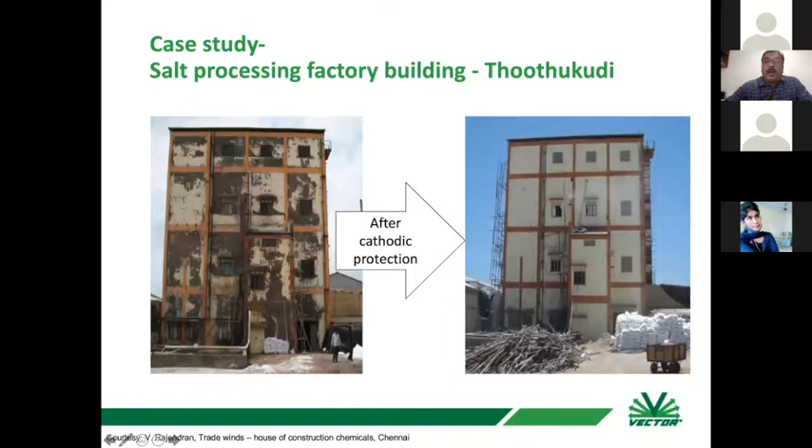This is a salt processing factory, and in case of a salt processing factory, you have a lot of chlorides and various problems. It was repaired using a CP system. These are the before and after photographs. Definitely, there was very high chloride concentration, continuous exposure to chlorides.

With conventional methods, we don't address that there is already chloride inside and high corrosion activity. So it will fail because of patch acceleration or halo effect, and you can see the various cracks.

Here again, the anodes have been installed, and then zinc-rich epoxy coating has been applied. But obviously, the spacing is very high. This was done about 10-12 years ago. I told you that we now have a more rational design, and the normal jacketing has been done. The only thing is adding this anode, nothing else.

There was a monitoring box, and we had measured and regularly monitored the corrosion, the current from the anodes, and it is performing. Again, when we do the cost analysis of the entire cost, the CP percentage cost was very low compared to the other part. So we found, and even published a paper, that the cost of CP might seem high initially as a unit cost, but when it comes to the entire repair system cost, it's a fraction.

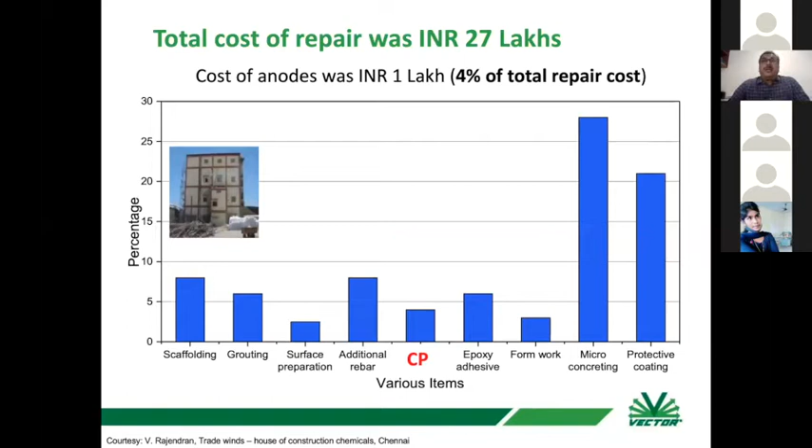So this I had shown you where there is a patch already spoiled and there are cracks. But while doing your NDT, you may come across a structure that is good, cracks are not there, but there is contamination ingress. In that case, you need a high initial current and you want to control the corrosion. So you need a different type of anode which can be drilled and inserted inside with special connectors.

Like this, a type of pre-stressed box girder where there is a patch and there is good concrete. The areas away from the patch still need to be protected, so you can have drill and fix anodes installed there.

Why I'm showing this presentation is from Dubai, which I had done, because nowadays you have a lot of multi-story buildings in Chennai with basements, multi-story basements, which are having a lot of issues with corrosion. Imagine this water coming out from the subsoil, having a lot of chloride. What will happen to your basement structure?

So when I visited one of the basements in Dubai, we found that corrosion stains were there and water was leaking. There were no cracks, no spalls, but we saw the corrosion brown rust.

So the consultant asked us to do the solution. I said, even if you arrest the water, you won't have a bone dry condition. If it is bone dry, it's wonderful. But since leaking is already there and you are seeing the rust mark, corrosion has initiated and the passivating layer has gone off during construction time itself.

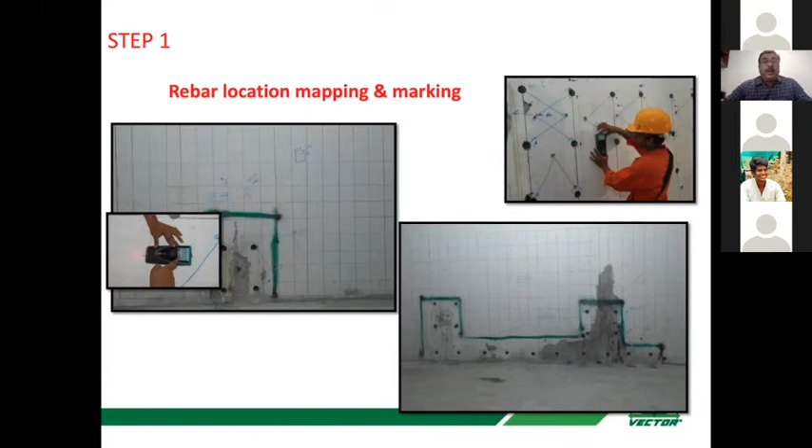And the connection is proper for 25 years - this is what we want. So we take care of every small thing: a proper connector using steel for the steel connection, then a gel-type button, and the anodes without cutting any steel, and then it is sealed with mortar.

We check the connectivity at all levels, and the voltage should be less than 1 millivolt if properly connected. So you need to check the steel-to-steel connection in the concrete, check the anode-to-steel connection in the concrete, and then seal the surface with low resistivity mortar so you don't see anything on the surface.

Simply paint it. You can install the monitoring box, take the readings, and see that your system is performing, with no external current, only a small piece embedded inside the concrete. You can save your basement from corrosion for 25 years. This is a good solution for what might otherwise fail in the near future in Chennai or other parts of the world where multi-story basements are being constructed and leakage is the problem.

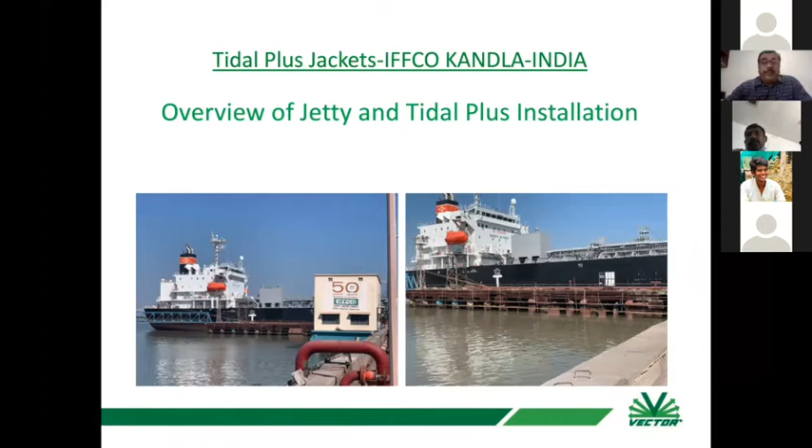Another case study I'm showing you is for jetty repair. This is for IFFCO Kandla, wherein the piles were corroding. The sacrificial liner had also corroded, and they had induced cracks and spalling in the pile concrete itself.

We had considered the height of the pile jackets, using special jackets imported from Canada. We had considered the height of the jacket as 5.5 meters because tidal variation is up to 5.5 meters there. We had installed the jacket from the bottom of the pile muff up to minus 5.5 meters, and a bulk anode was also installed at minus 6 meters to take care of very high current demand over time. The system was designed for 25 years, and the steel surface area was calculated.

This is the photograph. You can see the first left-hand side photograph, which shows the tidal variation of 5.5 meters. Then the scaffolding was erected and the steel liner was cut. In the right-hand side photo, you can see the removed steel liner, and the concrete has a lot of corrosion stains and some cracks, which were cleared with water blasting later on.

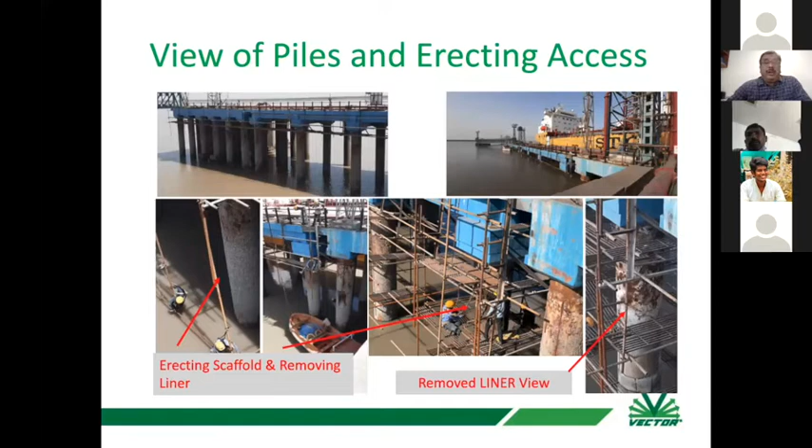And the anodes have been installed on the surface of the column. The first left-hand side photo shows the strip anode with a special fabric over the anode, which will keep the anode corroding; we want the anode, zinc, to corrode. So by wicking action, this cloth will keep the anode corroding. And then there is a bulk anode, in the center and the right-hand side photo, and special modular jackets have been installed, which will stay in place.

And then the concrete has been filled in between the old column and the new jackets. So it's a simple jacketing, but with the addition of special anodes with the wicking action, a bulk anode at the bottom which will be there in the water, and PVC modular jackets. And then you simply close everything. We are monitoring the system as of now.

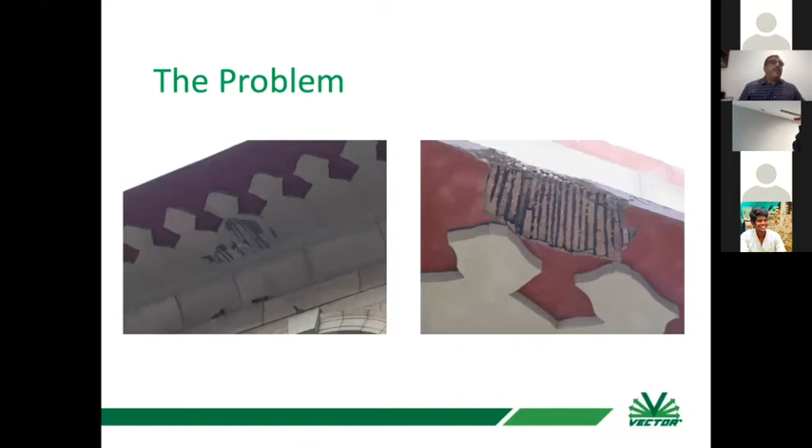In heritage structures, we talk of centuries. At least we can install anodes which will work there for 50 years, and in the contract itself, a 20-year guarantee has to be given by the contractor. So to develop that system, we carried out one pilot project wherein cantilever reinforced concrete sunshades with high corrosion of rebar and delamination of concrete were there. And earlier repairs had been done, but they failed prematurely.

And lime concrete was there; it was not cement concrete. So it was difficult for us to design the system. But we tried the pilot project with various options, and we found it successful. We developed a system which has a longer life, to protect any reinstatement already done from premature failure and retain the shape and size of the structure to avoid reconstruction of entire elements. We used different types of anodes, and we monitored for 2 years. This was the design, how the anodes were installed.

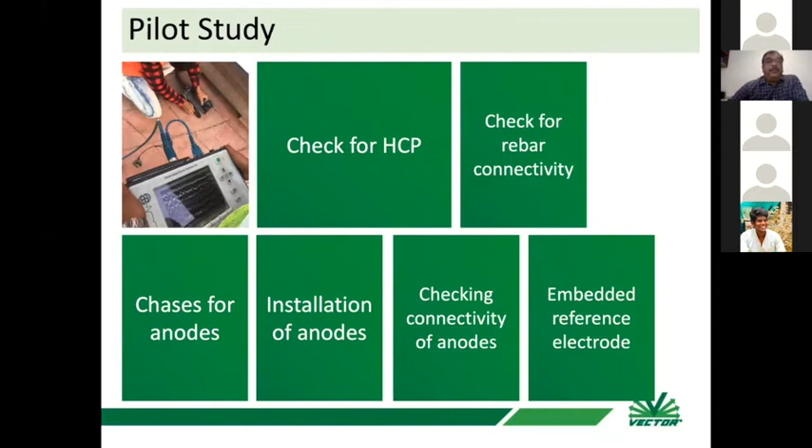If I show you various photographs, first of all, we located the rebar using GPR. Then we checked the half cell potential regularly in a grid pattern. Then we checked the connectivity of the rebar. All rebar were not connected. So we introduced a special rebar connector at the top, connected all the rebar with a wire, embedded them, and checked connectivity of all the rebar, every 5 to 7 centimeters.

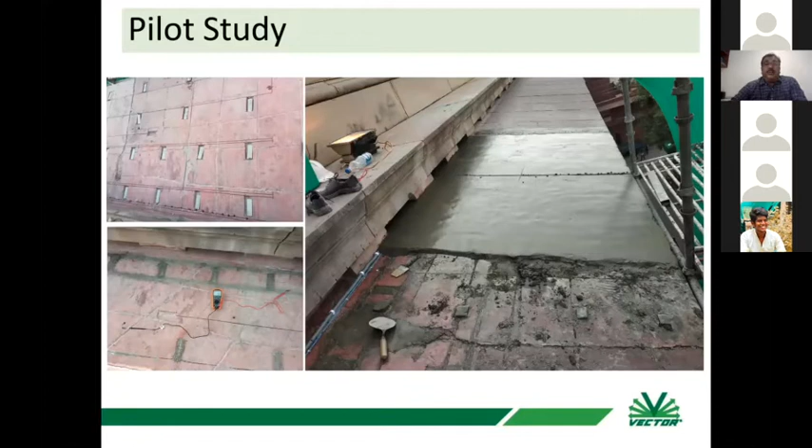Then we made a small chase for installing the anode, and the anodes were installed. Again, the connectivity of the anodes was checked. And we also installed one embedded reference electrode, so that we don't need to go there with a surface electrode to measure half cell potential. These are some photographs of checking the connectivity. Finally, the anode was covered with low resistivity mortar, and an overlay was laid because there was very little cover; we need at least 20 millimeter cover. So a 20 overlay was laid over that.

We had a person from North America who is CP4 to assist us in installing this type of anode. The key benefit is that these are 2-stage anodes. These are special fusion anodes, which give an initial very high surge of current, and then automatically convert into sacrificial mode. So there was no external current, and we were able to passivate the steel in a very short time. That's the most important thing, and it enhances the life of the structure, because the initiation of corrosion is delayed. And these are all alkali activated anodes, so there are no harmful effects to the concrete.

Further, we had installed the monitoring box, and we are taking regular current measurement and half cell measurement. And we found that initially, in stage 1, up to 100 days, it was having a very, very high surge of current, and we got very good negative potentials, and then automatically it converted into sacrificial mode, wherein low current is required, but everything was as per the ISO 12696. It passivated the reinforcement, and the system is working wonderfully. And now the full-stage project is going on for such heritage structure.

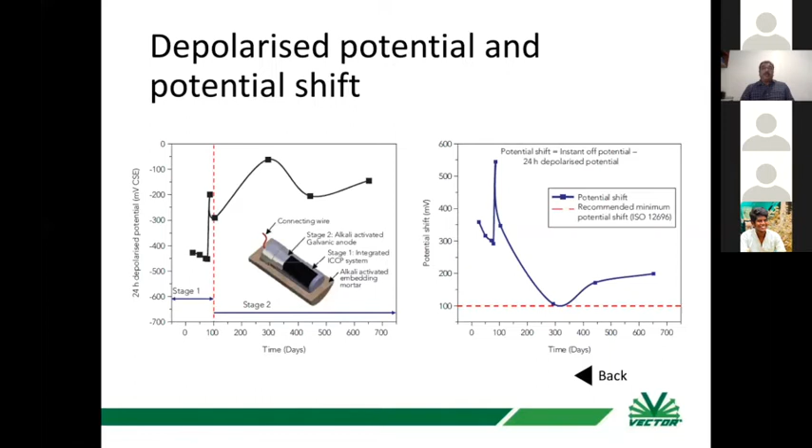The additional drop has been constructed around the column by making shear connectors as per the design. Even shear connectors have been designed, and roughening of concrete has been done for 20 millimeter amplitude, so that 50% of the shear transfer has been taken by the roughness, and the remaining 50% has been taken care of by shear connectors. 8.9 shear connectors were required, so we used 9 shear connectors per square meter.

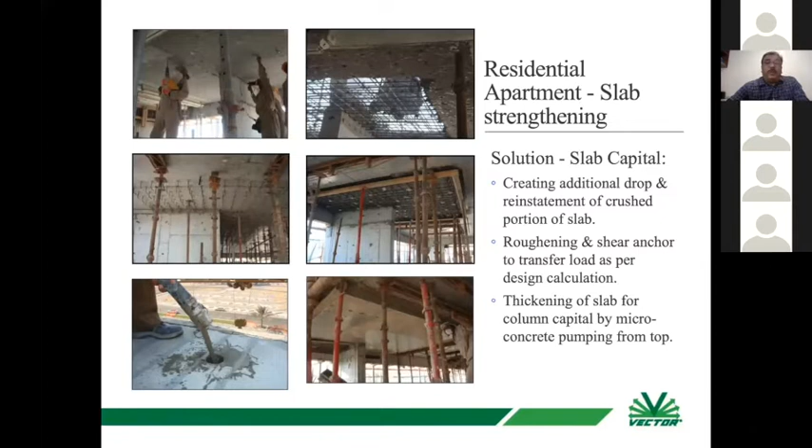And then after roughening and installing shear connectors, some area where it was highly damaged was broken out. And then we did shuttering, and micro concrete was poured from the top by making a drill. And the new drops were created. Also, we found out that there was positive and negative moment deficiency.

So we cut, and near surface mounted carbon fiber strips were installed from the top, and cost was the constraint. So what we did is we cut from the bottom, and we installed the rebar in the bottom soffit of the slab, like 12 mm steel. We used rebar grouting for embedding the new steel connection in horizontal holes; we drill 20 centimeter, 30 centimeter holes and insert the steel.

This way, we inserted the steel along the length for 3 meter and 4 meter, and 10,000 meters of steel was inserted on the soffit, and the building is standing wonderfully. It's perfectly standing. This was done under my design and installation back in 2009, and the system is working wonderfully since almost 12-13 years.

If I talk about CP usage in India, we have been using it since 2002 and it is growing exponentially; people are adopting the system, so there is no harm. And there are various buildings like chemical plants where it has been installed. In institution buildings also you can use such type of anodes. You can use the anodes along with strengthening also, to have a longer life.

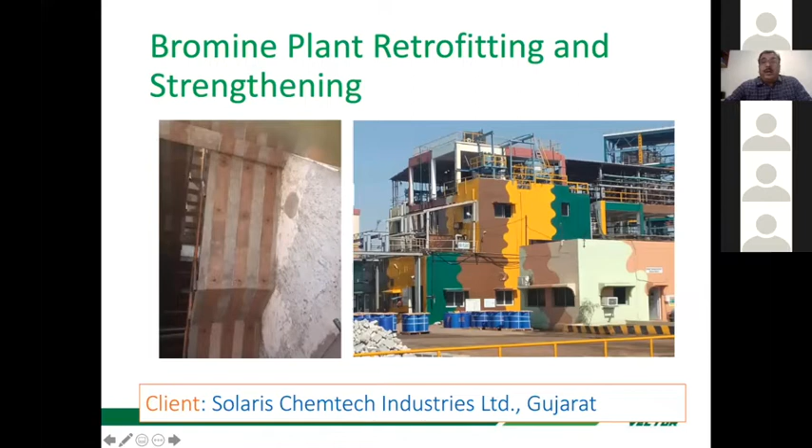But how to select the anode? Your anode has to have a proper activating mortar which should keep the zinc corroding. It should have an alkali material. It should not have halides or salts, and it should keep zinc corroding for 25 years, maintaining the pH, so that when zinc is corroding, you have a long-term connection of rebar and zinc for 25 years.

It should not be welded. It should be cast inside the zinc anode. If you have welding or screwing of the wires at the zinc, when zinc is consumed, this connection will go off and the anode will not be usable. So this is a wonderful technique, but poor practice or poor material will give you poor experience and the whole technology will die.

So before selecting the anode, you should know what type of anode I am installing, whether it will function there for years, not for months. We have in the tender or contract that 1 year is the defect liability period. So any anode will perform for 1 year or 6 months. You will not come to know of new cracks in 1 year. You will come to know after 3-4 years, 5 years. So your anode should be such that it performs for 25 years.

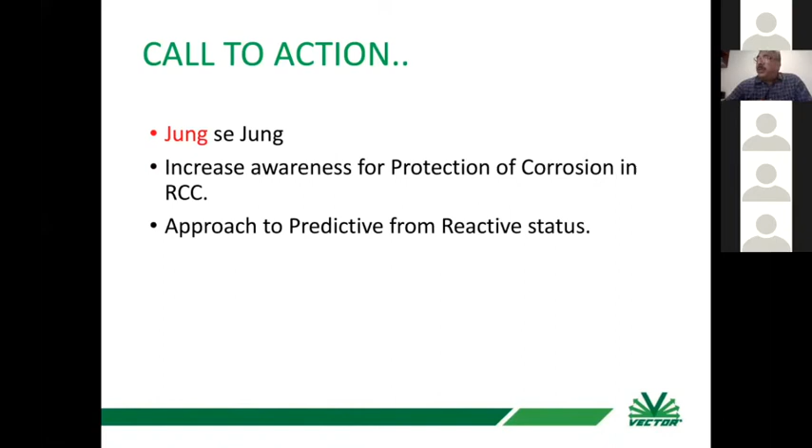What we do now is go and do the repair after we see spalling and cracks. That is the third level of corrosion. Whenever we see an initial crack or rust stain or something, we should immediately do NDT. Increase know-how of the technology available. This technology is available. Then there should be a specification at the design stage. We are trying to incorporate this in the codes also, BIS also.

I will just conclude that India is in dire need of an effective corrosion protection system. Corrosion prevention strategy needs to be implemented in new structures also. It can be targeted protection, and CP technology does not add significantly to the cost of repair. It can be considered a complementary system. It is not as costly as somebody might think. Repair using CP is economical when considering life cycle cost, and the anodes available in the market must be assessed before installation. Use of poor quality anodes can lead to reduced repair life and defame this promising technology. This is very important.

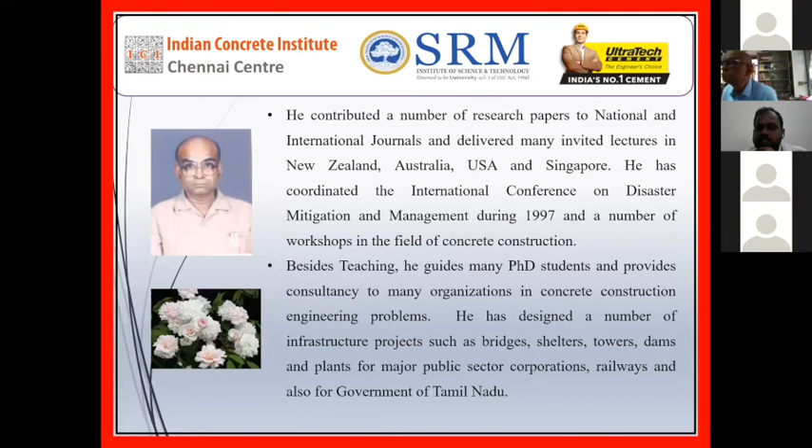He has designed a number of infrastructure projects such as bridges, shelters, towers, dams and plants for major public sector corporations, railways, and also for Government of Tamil Nadu. He has received ACCE Nagadi Award for the best book published on transmission towers, McGraw Hill, Singapore edition, through Association of Consulting Civil Engineers, India. He has also published a very popular book on concrete technology, Oxford University Press, which again received the ACC award.

Recently, he was acknowledged as an outstanding academic person and was awarded the prestigious Vishwakarma Award of Construction Industry Development Council. Thank you, sir. With short introduction, I request you to start a presentation, sir.

Thank you, sir. Thank you very much for the nice words of introduction. I once again thank all for giving me an opportunity to present a few of the case studies in which I was involved during my last service of 25 to 30 years, both at College of Engineering, Guindy, as well as at IIT Madras. I would like to share my screen now. I hope you are now able to see my screen.

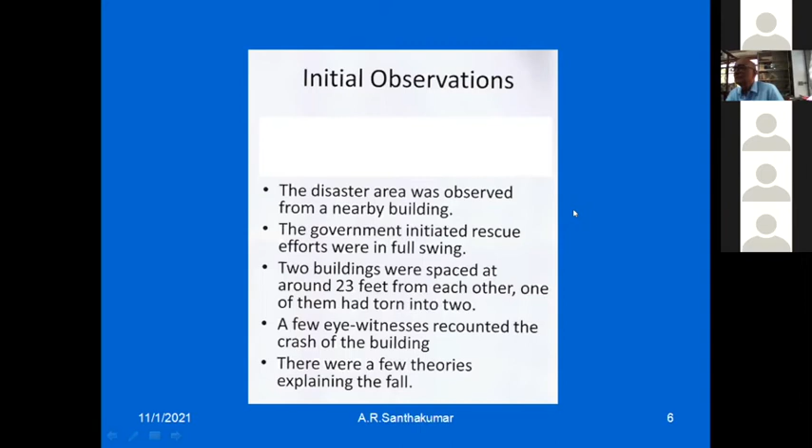There were a few theories explaining why the building fell, but ultimately we did a very detailed analysis. The reasons attributed are design, execution, improper materials, and finally the loading that would have caused the column to buckle. In order to further understand the reason behind the collapse, a team of 5 members, 3 from CREDAI and 2 experts from Anna University, visited the site.

A PWD soil expert deduced that the soil condition on which the building stood was good. Observations were made in 2 structures, one on the existing structure which has not fallen down, the other on the failed tower.

It was felt that more or less the type of materials used and the type of design were similar in the 2 buildings, and therefore the standing building was used as a benchmark building to benchmark why this building, which was by the side of the standing building, failed. The size of the building was around 75 feet by 125 feet plan area. The size of the columns and beams were around 300 millimeter by 450 millimeter.

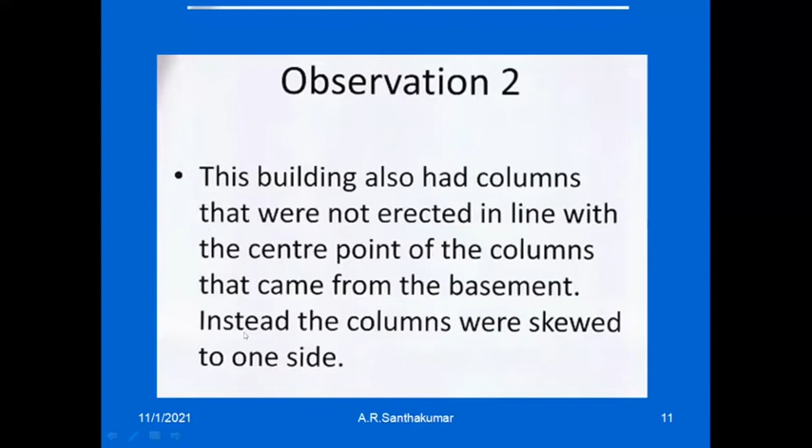The building also had columns that were not erected in line with the center point of the columns that came from the basement. Instead, the columns were skewed to one side. The span of the beams was around 30 to 35 feet, and the depth of the girder used was only 450 mm. To this beam, another cantilever beam was also connected at the midpoint, which would further create stresses at the existing structure.

The lift wells were made up of brickwork instead of shear wall. There was a lift well. This lift well was made with 4 columns at the 4 corners with infilled walls, brick wall, and there was no mechanism in place to limit the shear force, especially in the stilt floor.

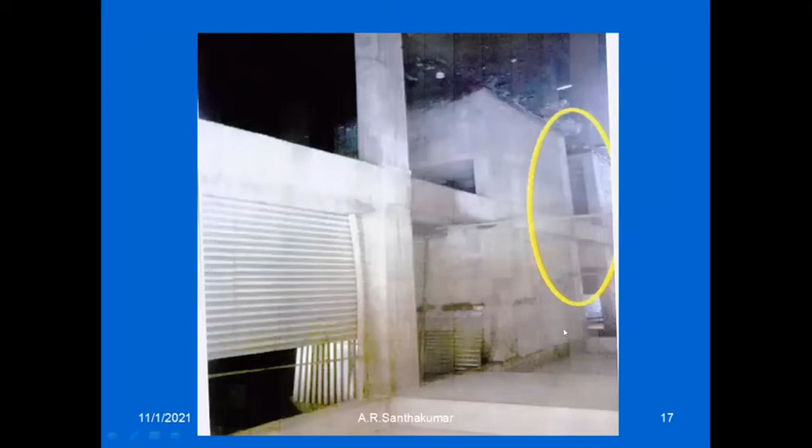This shows that huge span. This is the stilt area where the failure had occurred. We measured the deflections of the existing tower and showed that the deflections were far in excess, even for serviceability limit, even without any live load in the building. At the time when we inspected, there was no live load in the building. The building was cordoned off. Now, this is that lift well. You can see the lift well had only columns at the edges and also had only brickwork as an infill wall.

The outer beams, especially in the toilets, were punctured with 100 mm holes at 4 places within a span of 5 feet all around the building, exposing the stirrups and beam rods. In order to bring out the sewage pipe outside, which was roughly around 6 inches to 8 inches, all the beams had been punctured. And because of this puncture, shear reinforcement had been cut and removed. And in some places, main reinforcement had also been cut and removed.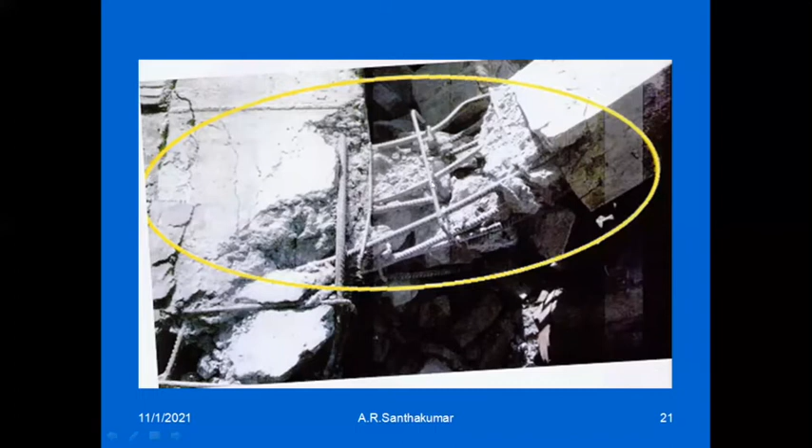Because of insufficiency of development length, all the steel had pulled out. Not only that, the required confining steel at the plastic hinge has not been provided. You can see that the stirrups provided are at large distances, not introducing confinement to concrete. The size and spacing of stirrups is what has happened.

The column reinforcement lapping were not staggered. We expect the column reinforcement to have detailing such that the reinforcement is staggered - that is, the lapping has to be done in the middle portion of the column, with lapping done not in all four corners, but 2 corners in one story and 2 corners in the other story. Such staggering of lapping has not been done. And the lapping had been provided in the plastic hinge zone. Because the lapping had been provided in the plastic hinge zone, the bars pulled out and did not yield.

This is the column which has fallen down. You can see all the bars have been lapped at the same cross section and not staggered.

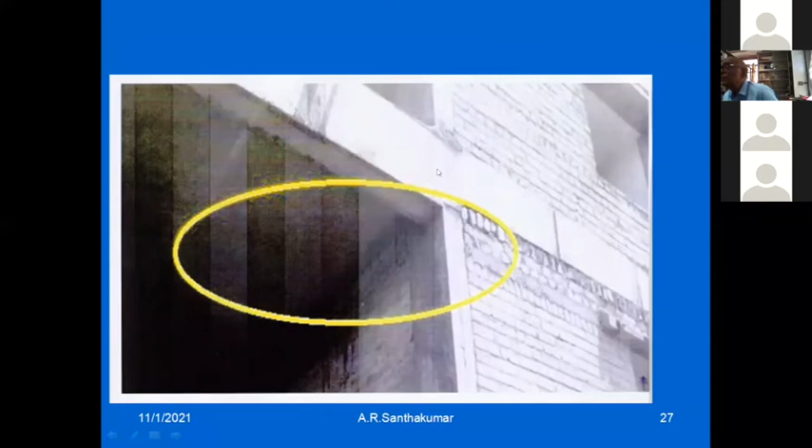The beam depth was not continuous. We observed that the inner beams were only around 300 mm. You can see the beam depth here and here do not match - here the beam is deeper, here it is shallower, and the level of the beam is also not uniform.

The design of the floor plan at the staircase and lift was done such that walls constructed from east to west formed a barrier for wind and light striking in the north-south direction. This leads to suspicion that wind striking at high force would have struck hard against the east-west walls, causing one side of the building to fall. You can see openings invited wind to go in.

Now, how did the collapse occur? The collapse is a typical pack of cards collapse. You can see the collapsed building - all hinges have formed in the columns. Column bars have been pulled out and beam bars have been pulled out. No plastification has occurred in the beam column junction; nowhere was there yielding of steel. This is what was surprising in such a big building.

All this happened because there was not adequate development length and anchorage length given at the ends of individual members. We call this non-ductile beam column joints. You can see the non-ductile beam column joints just pulling out. This is the non-ductile beam column joint. Here also, non-ductile beam column just pulled out.

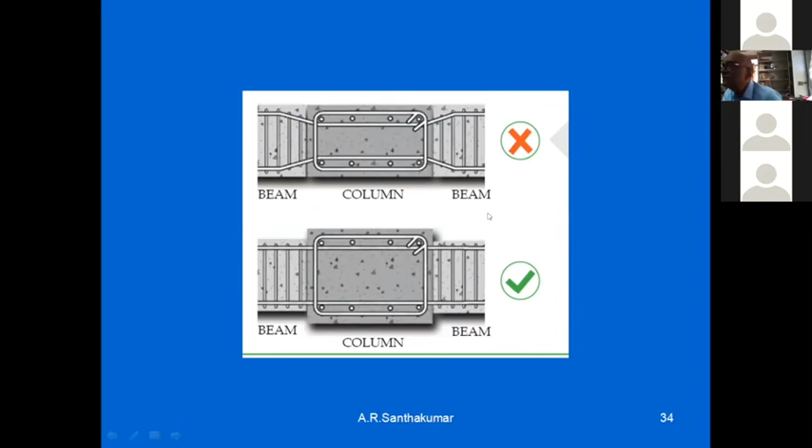In many buildings - this is a building which was being constructed elsewhere - you can see how the column reinforcement and the beam reinforcement is not aligned. The column central line and beam central line are not aligned; the beam is pushed to one side. This is a very serious issue because it creates a bending moment on the column, making the column fail.

This is another place, a multi-story building where we had witnessed vibration was not done in a scientific manner, expecting good consolidation of concrete. Instead, over vibration was done, and because of this, all larger particles had settled down at the bottom, and only 6 mm down particles settled at the top - indicating that several beams were suffering from segregation. When we checked the core strength in the top reaches of the beam, where maximum compression comes in, it was only around 10 to 15 MPa.

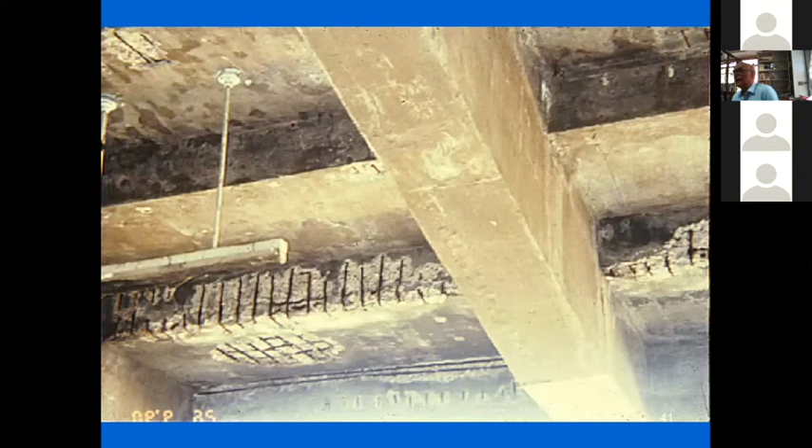One interesting point we could see in the Chidambaram Stadium was preferential corrosion between main bar and stirrups. Stirrups always got corroded first because they are closest to the outside atmosphere. When the stirrups are reduced in diameter, the main bar still has adequate capacity. Therefore, the type of failure in those bars shifts from flexural failure to shear failure. Because the beam is susceptible to shear failure, the failure happens without any warning. Therefore, the corrosion of steel changes the pattern of failure which the designer has envisaged in his design equations.

Another interesting failure which I would like to present to you is at a place called Tuticorin, in the Tuticorin thermal plant. Here, a lot of electrical conduits are taken. When we examined, various tunnels had been provided for carrying coal in the thermal plant. Wherever they had provided electrical conduits, and when the electrical conduits were not treated properly, the reinforcement inside the slab in the gallery had been corroded due to electrochemical action.

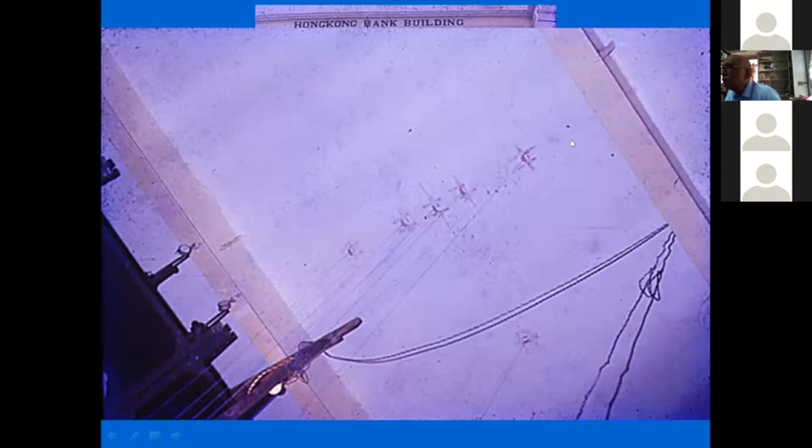This is the arch. So we did loading in order to find out whether the jack arch floor was capable of carrying the correct load. After retrofitting the jack arch floor with the introduction of additional strengthening, we loaded the structure. This is the plaque of that building. This is how we loaded the structure. On each and every floor, we marked the loading area, and we loaded it with steel ingots up to 400 kg per square meter.

When we loaded, we measured the deflection of the beams and the deflection of the jack arch floor, and showed that the deflection of the jack arch floor was negligible. Deflection of the beam was within code prescribed limits for serviceability of the building, and hence the building was loaded for 1.25 times the live load with steel ingots in steps of 25 kg per square meter. The load deflection curve showed excellent, linear performance, and hence the building was qualified and put back into service.

This repair was done in 1990, and till today the building is serving the Hong Kong Bank excellently well without any difficulty. So full-scale testing is possible, and it will reveal the condition of the building, especially in cases where you don't have reinforced concrete, but a composite system as in this case - that is steel girder, jack arch roof, and infill walls. This is how we measured the deflection.

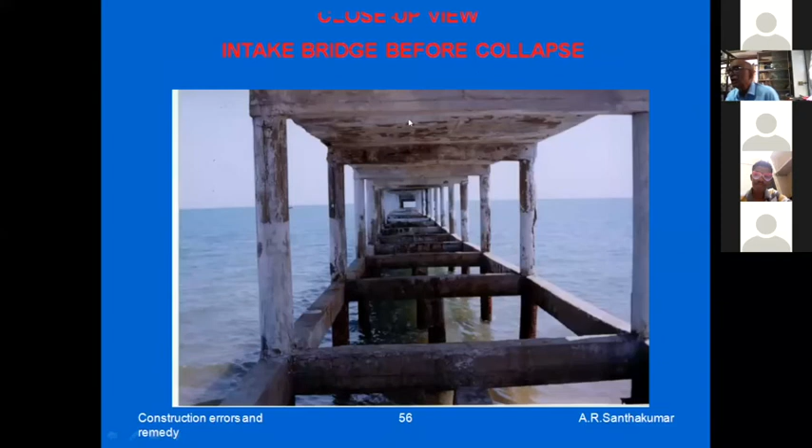You can see the corrosion effect, the corrosion here on the steel tubes. It's a pile foundation. You can also see the effect of corrosion here. This is how it failed.

On one fine day, 6 spans failed due to reinforcement giving away in the aqueduct. So what you see here is the collapsed portion of the aqueduct - this is how it has collapsed. This is the overall view, this is the existing structure. This is how it has collapsed.

Now the question is to rehabilitate it. They wanted rehabilitation to be done and the water to be restored within a week, because within a week they have to change the water. So we put a barrier here, put a barrier here, put a hume pipe between these two barriers, and water was pumped back so that the prawns don't die in the pond. After 6 months, the entire bridge was removed and a new bridge was constructed.

We will see some of the multi-story building flats. Many of the multi-story building flats are overloaded due to non-compliance with respect to codal provisions. I would like to show one instance of a multi-story building - how the failure has occurred and what type of support we from the university gave in order to see that the building doesn't collapse.

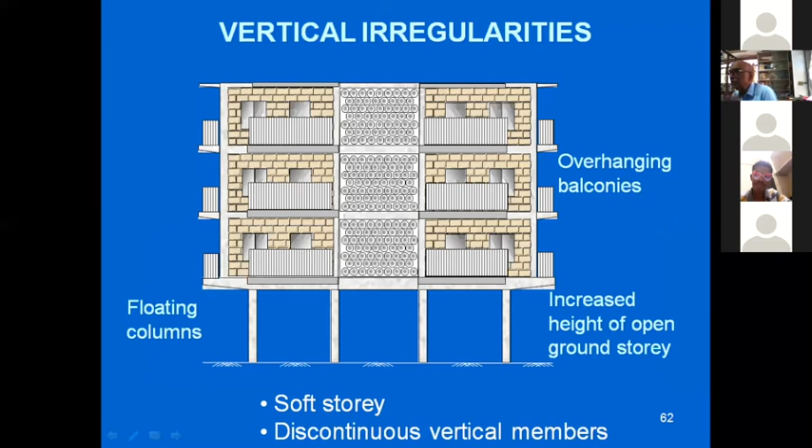So most of the buildings have this type of configuration where you have a column which comes and sits on a cantilever, and this cantilever supports the bottom story which is a car park - because it's a car park, it is a stilt floor. So you have a floating column, increased height of the ground story, and a soft story. You have discontinuous vertical members. These are the normal type of discontinuities you have in the existing flats.

Moment resisting frames are not well defined. Beams are eccentric with column lines. Beams are not framed into elevator core walls, not framing into the lift core. And the detailing is done poorly - at the plastic hinge you have the lap joint. This is again another problem.

How do you retrofit these buildings? These are areas where the red lines come, that which does not follow the code of practice. Deficiencies in the analysis and design - these are mostly designed for gravity loads only, designed for lower seismic force. Neglect of stiffness from masonry infill is usually witnessed. Unaccounted addition and alteration, and nowhere has the P-delta effect been considered in the analysis and design.

The strategies that we have suggested in about half a dozen flat systems is global retrofit strategies. Two strategies can be proposed: one is global retrofit strategy, another is local retrofit strategy. Local retrofit strategy is strengthening the beams and columns, but that will not give you a solution for problems like misaligned columns, which demand a global retrofit strategy.

Increasing the lateral strength and stiffness by means of addition of infill walls, shear walls, frames, and braces. Reduction of irregularities, reduction of mass. These are the global retrofit strategies.

You can see in this particular case, we have used an infill wall to strengthen the soft story and strengthen the foundation by means of addition to the foundation. By doing this, we were able to show that the building now is amenable to code prescribed limits, and therefore many of the buildings were provided with such intervention.

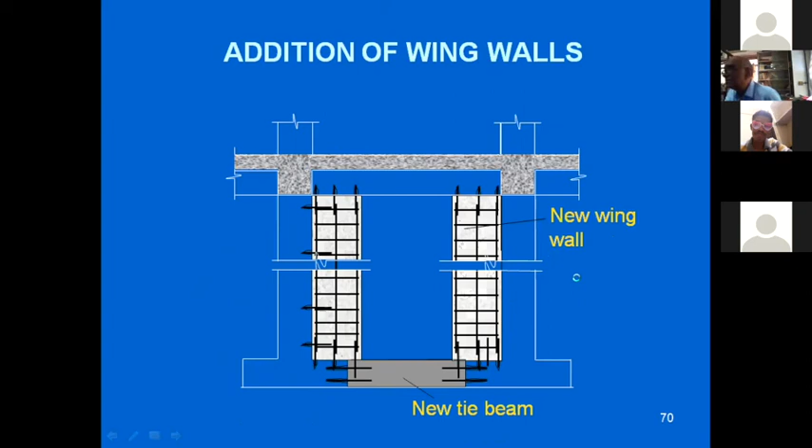This solution, addition of buttress wall, we used for a 10-story building belonging to Tamil Nadu Electricity Board. The Tamil Nadu Electricity Board had built a building housing their main office in Anna Salai. But that was designed in the 1970s and 80s, which did not have adequate seismic protection.

In order to have the seismic protection, we have introduced buttress walls on either side, with separate foundation for the buttress wall on either side, so that the seismic load is carried by the buttress walls that we have now introduced, and the inner portion of the building, which houses the offices, is not changed at all. This is an overall global retrofit strategy which we used for a 10-story building.

Now, in some cases, this is possible in industrial structures. In an industrial structure, you can go for what is known as bracing the open ground story, which will again increase the lateral load capacity.

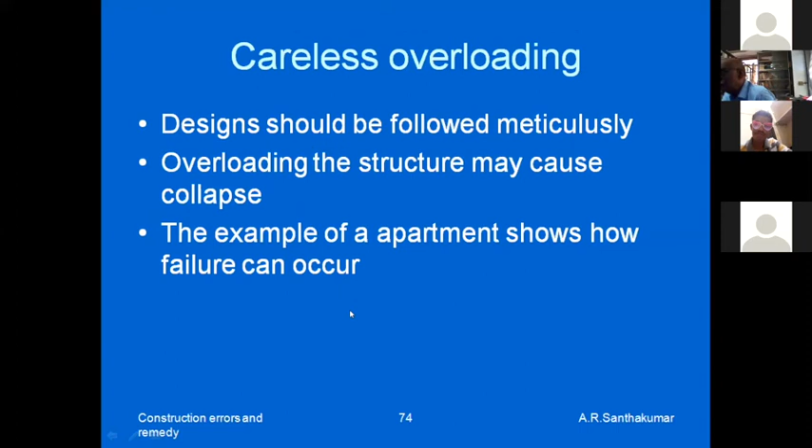In many cases, careless overloading of the structure has initiated the failure. Design should be followed meticulously. Overloading the structure may cause collapse. The example of an apartment building shows how a failure can occur. We have seen an apartment building. You can see this is

this was designed as a 6-story building. They built the 7th story. They built the 8th story. It was designed only for 6 stories. When they built the 8th story, the bottom story column literally burst. And when it burst, people were living in the upper floors. So temporarily, the building had to be supported so that it doesn't collapse.